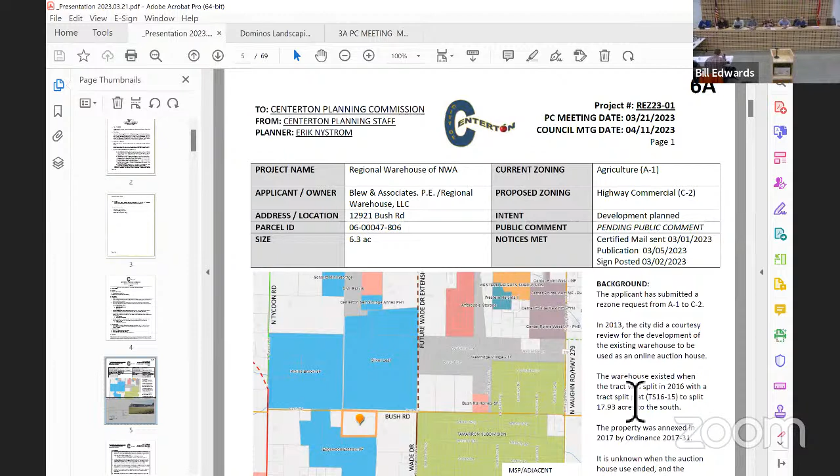Not yet, thanks. Eric, do you want to give us a staff overview? Yeah, so there's a typo on the agenda, it should be Blew and Associates, not Bates Associates. The applicant submitted a rezone request from A1 to C2 on a 6.3 acre tract on Bush Road.

In 2013, the city did a courtesy review for the development of the existing warehouse to be an online auction house. The warehouse existed when the tract was split in 2016, for the tract split plat, to split 17.93 acres to the south. And then the property was annexed in 2017. And we don't really know what the current use of the building is.

But their intention is to develop RV storage on the site. So the proposed zoning intends to have businesses that are dedicated, that are suited towards highway traffic, such as service stations, drive-in restaurants, motels, supermarkets, and similar businesses. C2 zoning contains the highest uses of commercial zoning districts, but less intense than the industrial zoning.

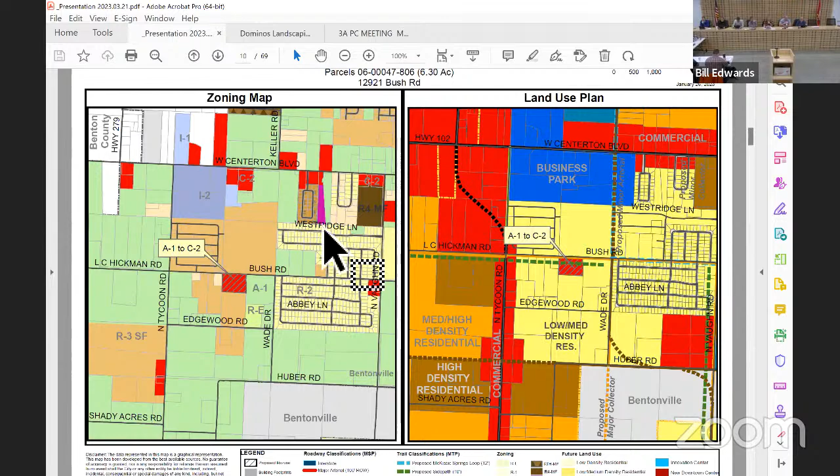The proposed rezone will take place in the land use plan, what it currently deems as low medium density residential, consisting of detached residential homes with an overall density of 3 to 7 units per acre. The overall lot size and density may vary from one part of the community to another. Low medium density neighborhoods should remain the predominant form of residential development in Centerton.

So this wouldn't really be a consistent rezone due to the fact that it doesn't meet much of the following implementation items. One, it doesn't necessarily encourage regional commercial development around major roadways to capitalize on accessibility to consumers and high traffic flows under C2. And then the other is to encourage compatible business near residential neighborhoods to increase access to services and amenities.

What remains consistent, however, is it does allow nearby commercial centers for goods and services to meet the needs of seniors and supports aging in place. It also focuses on short-term investment on infill to avoid significant investment in capital improvements in greenfield areas.

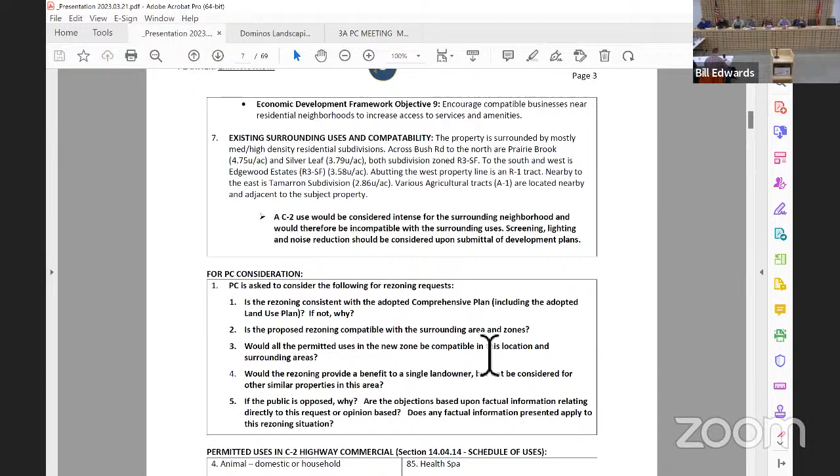Would all the permitted uses in the new zone be compatible in this location and the surrounding areas? There is a list of the permitted uses in the highway commercial for your reference if you wanted to take a peek. I do think that there are some. I'm not sure that everything in this particular location would fall into that - fuel station, pawn shop, restaurant, one really makes sense. Yeah, it's not at a major intersection or anything, it just kind of sits along the road in between all of the housing. But again, I wouldn't say all the permitted uses, but some of them would be. Does anybody disagree with that or have any discussion?

Would the rezoning provide a benefit to a single landowner but not be considered for other similar properties in this area? I know we always have discussions on this, whether it provides a benefit to the one landowner. We would go through the same consideration as we always do for properties in this area, so I don't think it provides a single benefit. We would consider it and open it up to discussion for any of the commissioners.

And the last question, if the public is opposed, why? There were no objections, questions, or comments from any of the public. I would say the notifications go out to nearby residents, and most of that is vacant subdivisions.

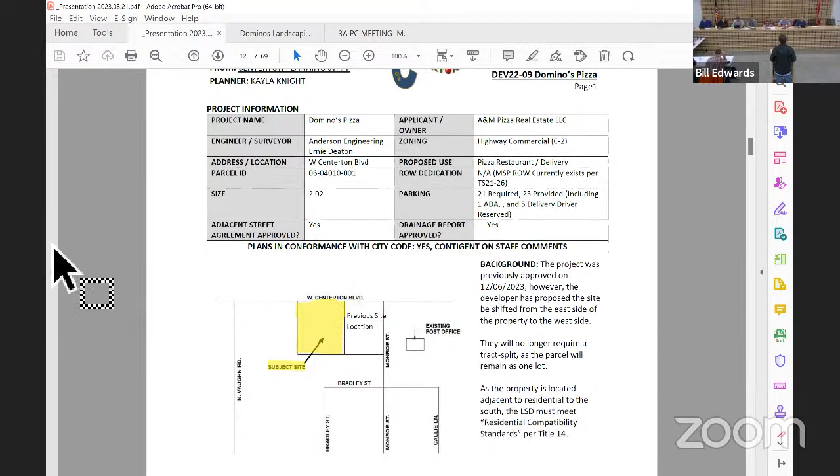This one went before planning commission back in December and was approved. They wanted to come back and make a few changes, most notably to go for a more conventional detention pond over on the east side of the property. We went through a couple rounds - I know there were some more comments either last week or earlier this week, and I believe they've been addressed as of today. Correct me if I'm wrong, but I'm here if y'all have any questions or to answer any questions. Thank y'all. Good, thanks.

Kayla, are you doing the overview? So this project was previously approved on December 6th of 2022. However, the developer has proposed that the site be shifted from the east corner of the lot to the west middle lot, and they're no longer splitting it, so it's going to remain one parcel for now. So we're going to go through a few things you guys probably know from last time.

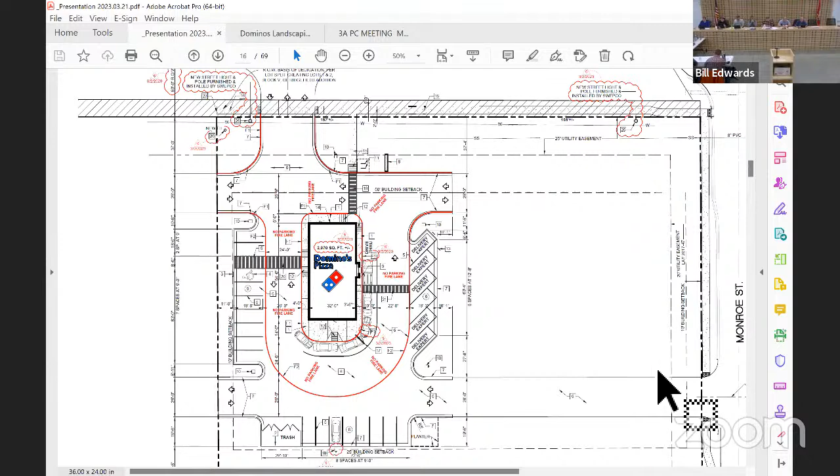There's water and sanitary sewer available along West Centerton Boulevard. They are doing a detention pond on the eastern side of the property. For the adjacent street agreement, right of way was already dedicated via tract split TS21-26, a small property split, so they don't need to dedicate any more right of way. They will be proposing a 5-foot sidewalk, street trees, and street lights along Monroe. And because of the widening of Centerton Boulevard for ArDOT, staff recommend a 5-foot sidewalk along Centerton Boulevard instead of the typical 10-foot, as well as street trees and street lights.

In terms of access and future connectivity, one entrance is proposed off of West Centerton Boulevard. When we went back and looked at this, we made sure it lined up with the proposed Harps entrance, so we're not having left turn conflicts. We've also got one entry on Monroe. We made sure to ask the developer to provide stub outs on all 4 corners of the lot because it's a middle lot, so the 2 lots next to them have access to those 2 entrances, and we're not getting a bunch of entrances off of Centerton Boulevard.

In terms of lighting, they've got 2 new street lights on Centerton Boulevard, one being at the intersection of Monroe and Centerton Boulevard. They have to do a little offset due to, I think, a power pole that's over there. My comment was that we wanted to see a light on the Monroe entrance, and that's in a new submittal they gave us today - they did provide that, so we've got that.

We've got street trees and parking lot islands. They did provide screening along the dumpster and the southern side of the property. On my last round of comments, I asked for even more landscaping, so they get further credit with the more landscaping they give us. This is the most current landscaping plan - yes, this is the one that's up here now, as of today.

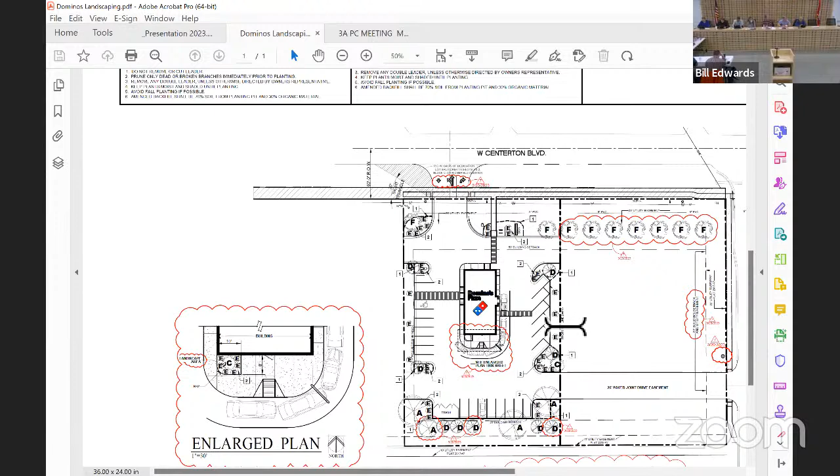Deliveries, I assume they're just gonna go out to Monroe. No, I don't think they'll be able to, because if they're pulling in, they'll have to back out and then come out here. Thinking of coming in, coming around the back. Parking is -- they've designated the east side for delivery. I didn't see that according to this. Yeah, I know we've got two different plans, but the delivery designation is on that right-hand side. So they would back out and then go out to 102.

Any other questions or comments from any of the commissioners? I'm sure you'll look at the dumpster enclosure, right? Okay. I think it looks good.

Just the access easements, how y'all wanna handle that.

If there's no additional comments, then I want to entertain a motion for development 2209, Domino's large scale development. So, on a motion to approve development 2209 Domino's large scale development, pending satisfaction of staff comments. Second. Motion and a second. Is anyone opposed? Thank you. Thank you. Good luck.

All right, next on the agenda is subdivision 2119, Amba Estates. They're requesting an extension. This is at 8660 North Rainbow Farm Road. It's 23 duplex lots, 7.89 acres. It is zoned R3D.

How are you? I'm doing good. Great. Representing the owner. You want an extension? Yeah, due to several factors with the Department of Health approval, getting agreements between other landowners and subdivisions, and the lift station.

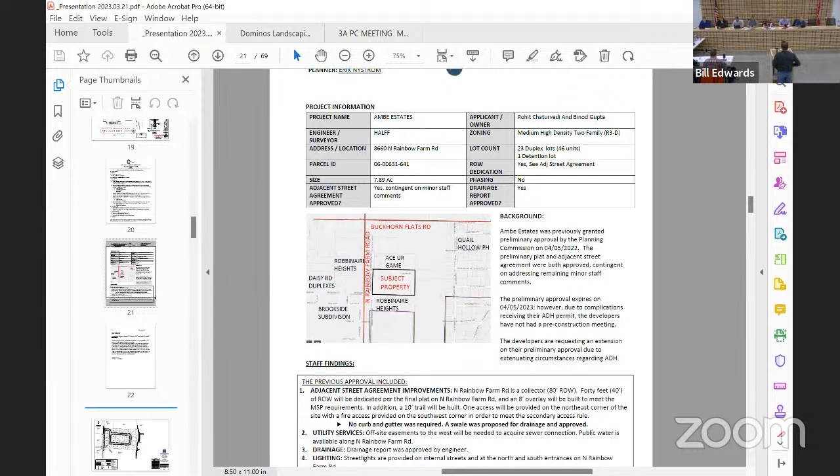Extensions. All right. Any objection from staff? I don't know who this is, it doesn't have a name on it. Any objection? Yes, you have an objection? No. Okay. Any questions from any of the commissioners?

You gonna get an ADH extension too, I assume? I see that mentioned in here. I didn't. Well, just with what's going on with the Department of Health -- actually, the lift station is progressing through the Department of Health, but then with the complications of Centerton and the Department of Health, and just all the other factors.

I think it's being addressed. If there's no other comments, then I would entertain a motion for subdivision 2119, request for an extension. This is Joey. I'll make a motion to approve the request for extension for subdivision 2119 Ambe Estates for 1 year. Craig, I'll second. Motion and a second. Is anyone opposed? Thanks, sir.

Good luck. Thank you. All right, next on the agenda is subdivision 2217, The Landing. This is a preliminary plat at 8931 Greenhouse Road.

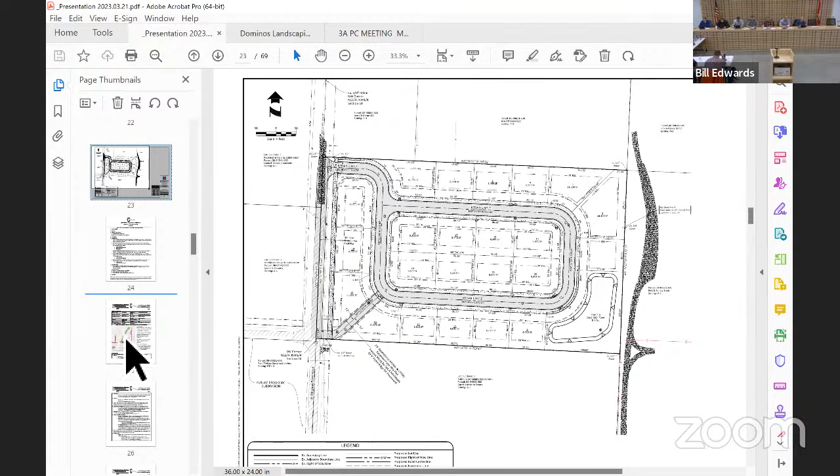40 lots, 10.27 acres. It is zoned R3 single family. The applicant is Roth, and engineers are Bates and Associates.

Jeff, what do you got for us? Y'all have seen this one from Bates and Associates a few times, and we've read through all staff comments and are ready to move forward. We'll be happy to answer any questions.

Diane, do you want to? This one is Kayla's, spearheaded, Diana's gonna back me up. So this is located between Creekside Phase 1 and Quail Ridge Phase 2. It was previously rezoned from A1 to R3 SF.

There is an approved PUD because this had a unique shape. 0.63 acres of it are in the floodplain, and there was a really unique circumstance of them giving us a lot of right of way. That PUD was approved September 20th of 2022.

For density per the PUD, their maximum density can only be 3.94 units per acre, and their current proposal has a density of 3.84 units per acre. Per the PUD, no less than 27% of the development could be open space, and they're currently proposing 30%. For parking, they had to provide 2 covered and 2 uncovered spaces, and they are meeting that as well.

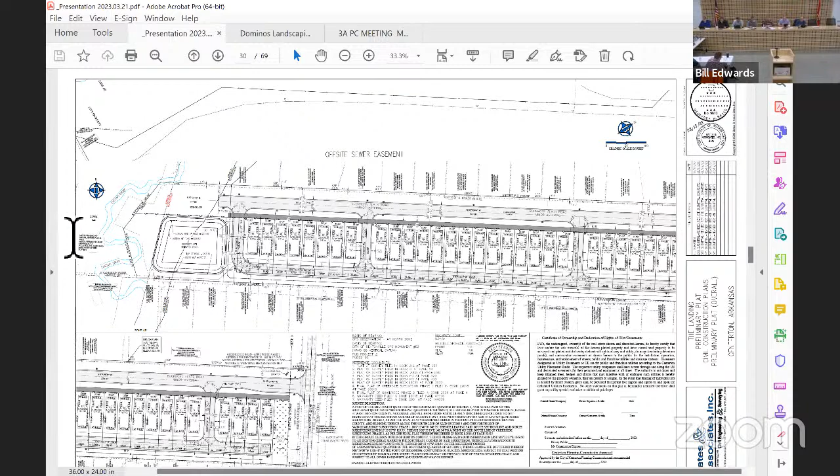For Centerton water, that's available along Greenhouse. Sanitary sewer is being proposed to connect to a manhole offsite to the north side of the property. That offsite sewer connection won't require an easement because it's on city property.

The public has addressed some concerns about disturbing the natural preserve. It's part of the preserve—there is already a sewer line in that preserve, and they would just be connecting to it.

0.63 acres of this is contained within the floodplain, and a floodplain permit was submitted on 3/14. It's being reviewed currently. They also were required to submit a wetlands assessment, which we haven't yet received, so any approval will have to be contingent on receiving that.

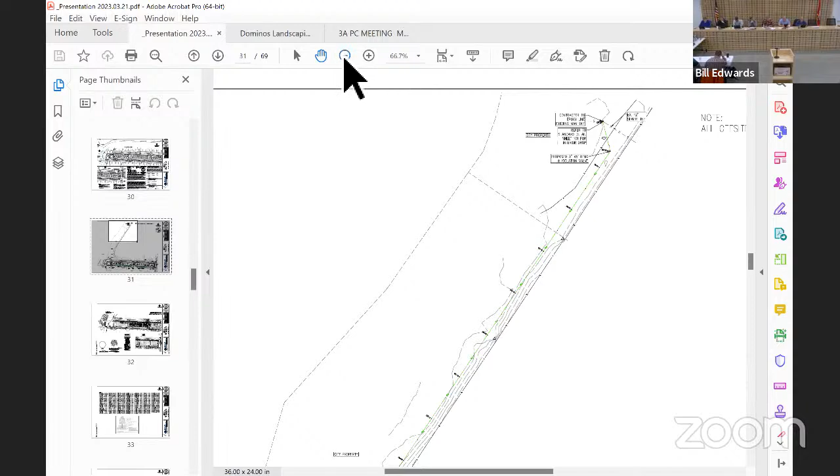For drainage, there's a retention pond proposed on the west end of the property adjacent to the floodplain. There's one minor comment remaining about the pond. Other than that, staff approves it.

For the adjacent street agreement, they've got proposed Buckhorn Flats Road. It's a minor arterial, and on the master street plan it's proposed along the south side of this development. But the city asked the developer to move that minor arterial to the north side due to the proposed widening of Greenhouse Road and the way things ended up lining up. So they're giving a full right of way of 80 feet, all of which will be dedicated with the development. They will be completing full widening of the road, curb and gutter on their side, and also doing the 10-foot trail, street lights, and street trees.

For Greenhouse Road, it's a major arterial with a 100-foot right of way, so they'll be dedicating 50 feet of right of way and then doing street lights and street trees. Other improvements will be completed with the Greenhouse Road Improvement Project. Staff was in favor of not requiring any fee in lieu for the greenhouse improvements because they're doing the full 80 feet of dedication and improvements.

There is a trail on the master trails plan, McKissick Springs Loop, proposed along Greenhouse Road, with a bit of it also on Buckhorn Flats Road. There's also a proposed 10-foot side path along the west side of the property, traveling northeast-southwest along the creek.

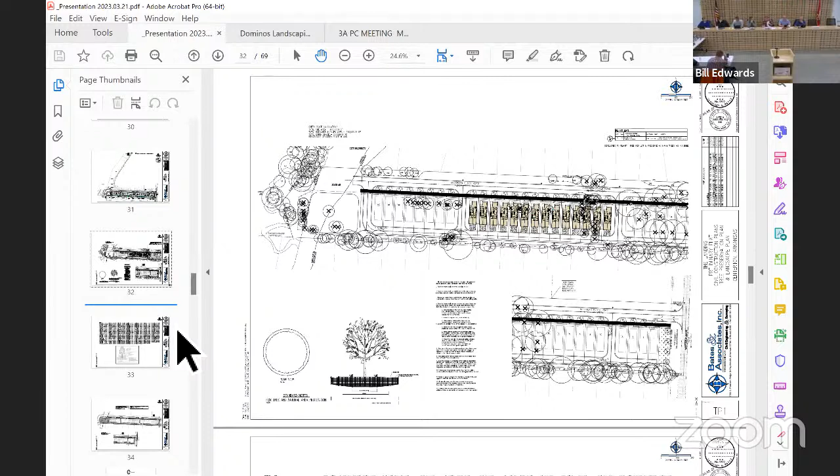But Jeff, looking at your stacking on your exit out on greenhouse, I was wondering if it would make more sense to extend that right now, so when greenhouse does come through, you don't lose like 30-40% of that stacking. Good - didn't really affect anything. That makes sense to me, but just wanted to throw it out there.

With the greenhouse expansion, they're still working through the 30% plans. The big thing that changed a lot from last time was that the road was on the south - it's on the north now. Had it remained on the south, there's a traffic light proposed at Quail Ridge as part of that expansion. Putting it on the south side would have put the access road 100 and some feet from that intersection, which just wasn't conducive for safety and people getting out of it as it was. So we'll flip to the north side.

It won't have left turn out from there - not when greenhouse expands - because it's going to be a divided highway, so it's actually going to end up blocking that left turn, backing onto... not sure what Quail Ridge is on the other side of greenhouse. Do we even need...

I guess in the short term, until that's done, the left turn would be nice. Correct, and part of it is there's flexibility on that turning, but the worry is with that divider going in - trying to see where that stacking goes with that. Are we going to push it back? I mean, like I said, that's part of where we're at with the 30%.

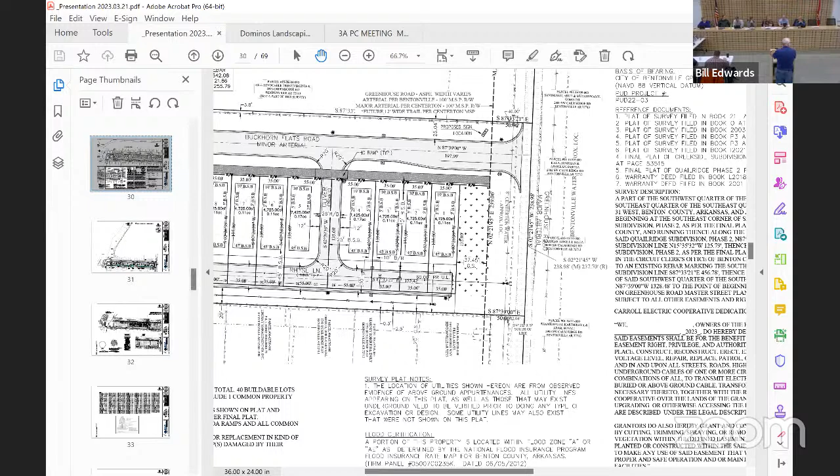The other part was with moving it north - in order to put it on the south as originally planned, there was at least 2 or 4 homes that would have been completely taken out in order to put a roundabout in, to even try to tie that road in. So when we moved it north, does that do anything to the creek crossing in the future for tying into Buckhorn Flats? Any kind of bridge actually gets longer just to make that move back to the south, but it doesn't actually change.

The other thing - I think it's fair to waive the greenhouse requirements because you're building a whole road, but... you know, it stops short. What's the plan on that? We use that as a transition to tie back in with Buckhorn. Continue? I mean, it stopped short - I don't think it goes to the end of the property. It doesn't tie back in at the end - that's the creek.

That's where the creek bridge is. That would end up starting, you'd have to make that connection. Stopped at floodplain, good with it. That's a logical place to stop it. Yeah, 'cause that's where the bridge would end up starting, so. Yes.

Mayor, I just wanted to ask, I've received phone calls on this. Since it came in so late, I printed you one resident concerns, which is pretty much a consensus of most of the residents that I've heard from, the same concerns.

The only thing I asked too is apparently there was a sign posted on the property. I think some of these are residents there and they thought there might be a public hearing or they'd be able to offer any public concerns due to the sign that was posted. I don't know if it was a public hearing sign or a public notice. Anyway, I think what I wrote you pretty well sums up what their concerns were, and I just wanted to ask if they had any other additional. That's all I had, thanks Mayor.

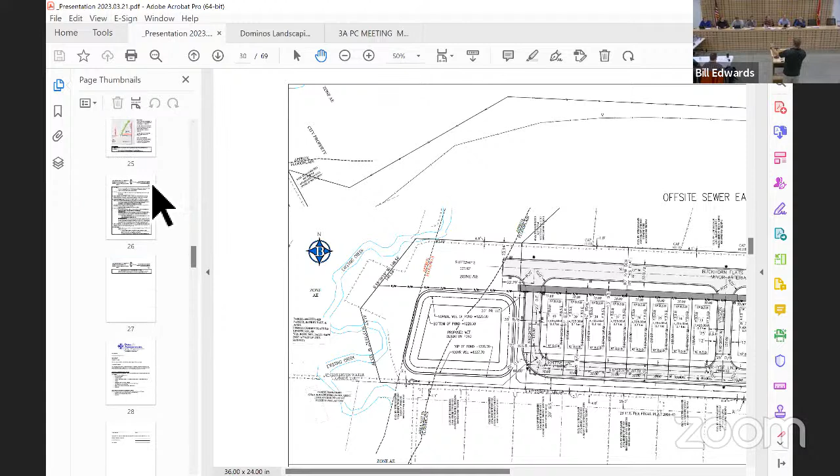Because now you're going to have to run a road and split it, it's gonna be about the same shape. If you are gonna develop it, it's gonna have to be as congested as that for the future. Are you talking about a greenhouse? No, I'm talking about Buckhorn Flats Road to Buckhorn Flats Road, because if you draw that line right there, it goes straight through my house. Then it'll curve to meet Buckhorn, or if you even curve it on the property adjacent to mine on the east side.

We don't know when that road's gonna be finalized. It's not like we're planning to make that full connection right now. So I understand your concerns when your house lines up with it. Likely that won't happen until you decide to sell or develop that property. And just like this, we'll consider where the road goes at that time. And let's say you do sell your property, somebody's probably gonna develop it and put a bunch of lots on it, so they'll design around that to carry that road through.

You know, took all that into consideration also when you moved all this, because it was supposed to be a split minor arterial, right? With the median center divider, 100-foot access down against the north side. I don't know the specific section on that. That's what it was, the street section, the first time we came. And that's when they were building the homes.

Can y'all pull up the map for the trailway and everything they want to do? How is it gonna... plans? No, the plans that y'all have currently for the Greenway. That was planned to go through there. Or Master Trails, yeah, plan. Master Trails plan. Master Street plan too.

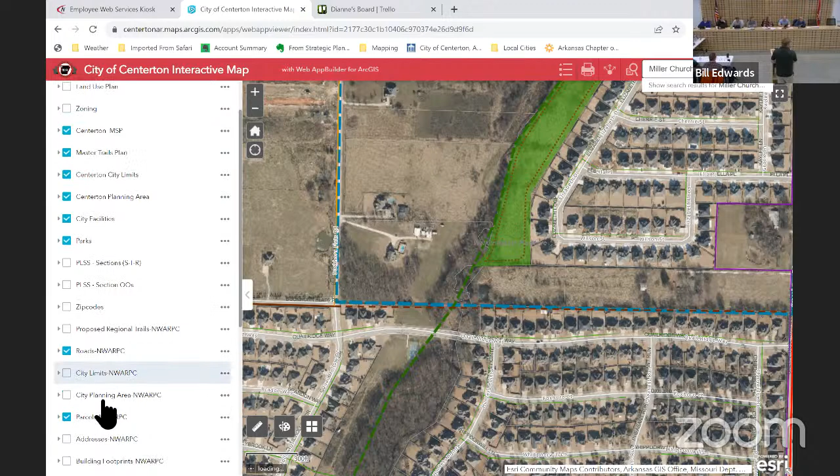Now, as far as greenhouse, what are the future plans for it? How soon is that gonna happen? Because right now, we see it every day. We almost have to dodge cars on a daily basis. It is chaos trying to get our kids to school. We're trying to just commute that road, period. And if you're gonna add this many more houses to it...

Is there any laws or anything set up to where the congestion problems should be addressed before it's built? No, sir, there's not. I don't know, Alan, if you want to address—I mean at least 3, maybe 5 years, I think was the discussion when we were here. That's a massive concern, if y'all have driven that.

Yeah, greenhouse is in the process of being designed and expanded. But these do take a long time, with the amount of rules that they have to go through. Right now, the plans aren't even completed with it yet. And then once those are through, they can start working on the utility relocations and then the actual widening of that road. So by the time it's all said and done, you're still looking at years down the road.

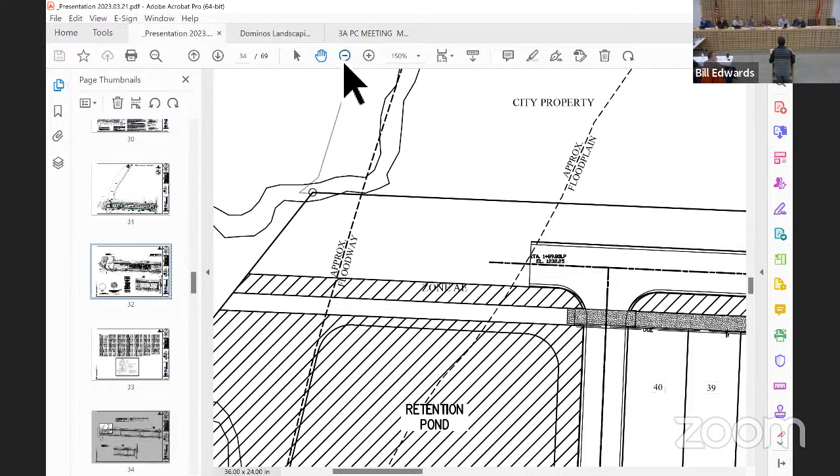If there are alternatives in how that can be run, rather than taking out nature that's back there and impacting the wildlife, because there's a lot of deer and other animals that come through there.

The second piece—I know it's already been approved, but safety is a huge concern. If you have not tried to turn out of our neighborhood on Ella Place in the morning during school drop off, I can sit there at that stop sign for 5 minutes some days just trying to get out. I have serious concerns as my kids get older and able to drive, being able to make that turn. I understand it's 3 to 5 years away, but there are plans for that.

I have very strong concerns on the amount of homes and the amount of traffic that'll be increased there, not only through this location but also the apartments being placed at the end of Greenhouse.

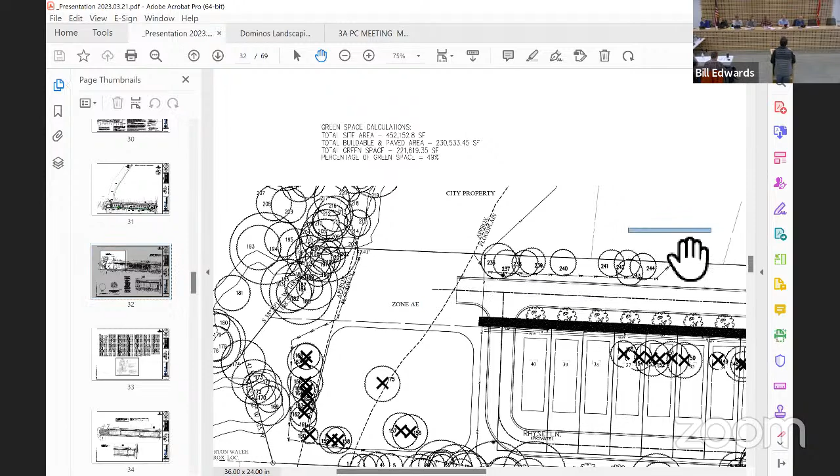On the third point, it was specifically the homes and how far west of the units they're being placed, extending past the home line within Creekside, if I'm reading the map correctly. These furthest units to the west are going to be looking directly into the backyard of other existing homeowners.

That was part of my concern about how much screening is going to be planted or kept there, which I know was at least mentioned a little bit earlier, but making sure there is a screen or potentially pulling those units back for consistency with the existing home development that's there.

Well, you can see the trees proposed—those are existing, and those are existing, they're going to remain. There's a tree per lot on that side, in front of the houses. Jeff, is the front of the house facing south? No, the rear is. Okay, and then the axis of the drive or the garage is from the garage south—it should be on the back, on the south end.

So that's my concern, you can see the line right there—that would be the last property line. Those last two units are going to be looking directly into the backyards of existing homes. It's like the property actually goes further west than Creekside, if that's the last lot in Creekside.

I mean, that's my point. But that's their property that they purchased—it's a different shape than Creekside, so, I mean, that's how it is.

Privacy is a value there, but it's also important to make sure it's not getting into that floodplain. From experience, it's a wetland and it gets extremely wet. It does flood very often. There have been a couple of years where, since Creekside homes have only been there for 3 years, I've seen that water level rise very close to our house, all the way at the backside of the Creekside property line.

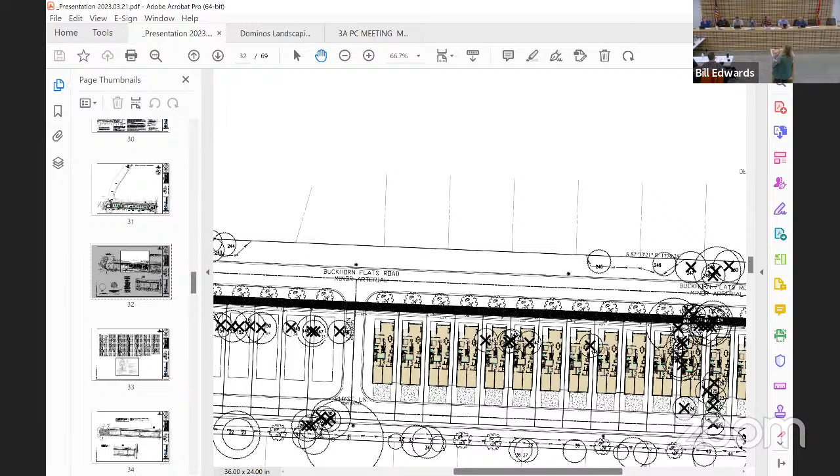On the landscaping code, it says there would be 80 trees, but the staff felt 35 would be enough to cover it. I wanted to know why you're looking at 35 trees instead of putting 80 back. I think 87 were being removed.

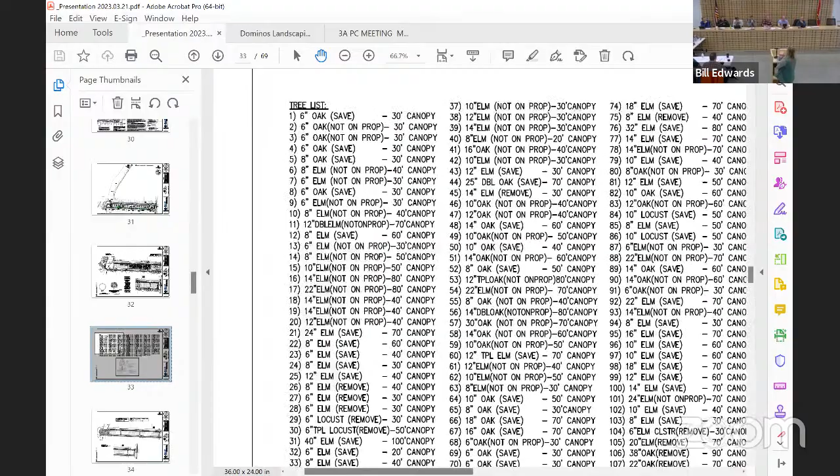It was code to put 80 in based on that, but it's not actually been adopted. It's in a draft form that still needs a little bit of work, and then it goes to the public, and then the city council has to approve it as well. Today it's just a suggestion, and we ask for those things, but we can't require them to necessarily do it.

The other part is that when that road gets expanded, it's gonna go north. I don't know how much green space would be left. I don't see that ever being expanded north. There should still be enough space that trees can be planted by the city there, in the city right of way. If you look at most of the trees being removed, they're where the homes are gonna go.

And then they're adding trees back in front of the homes, adding about half of what they're taking. I don't believe they're taking 80 - what was referenced in the report was what the draft landscape ordinance would have called for, and they thought that was a lot. I don't disagree with you, because I brought that up first, that maybe some trees on the north side of that road would help, since it would be more directly in, closer to those existing homes. We can let Jeff or the developer talk about that if they'd like.

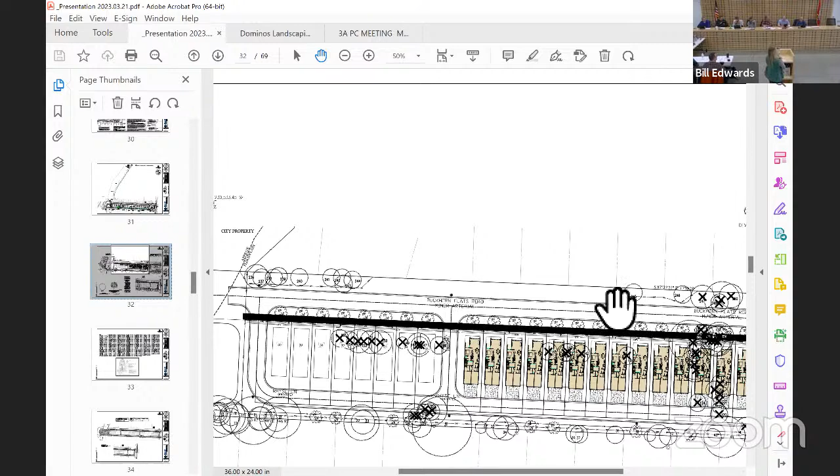Hey, Jeff, what are y'all's thoughts on putting some trees on the north side of Buckhorn for the existing residents? Because she did make a very good point about the streetlights, one, and then two, it just helps screen.

Yeah, we're not gonna take out any trees if we don't have to. From the back of our house to the south, we're 80 feet to the Quill Ridge property line, and from the front to the north, we're 100 feet. Maybe this is a better way to look at it: the south property line has a ton of trees and vegetation on it. On the north, we're taking out 4 or 5, but there are some large gaps where there aren't any trees, and that's where they're gonna be putting in lights.

How would you feel about filling in some of those areas where there aren't any existing trees? If we've got to put a few trees in, I'm all about that. We'll do our best to not take any out - unless it's just what we call a scrub tree, an old broke down elm tree or something that's not gonna live and will cause problems later. But any nice tree, we're gonna do our best to try to keep.

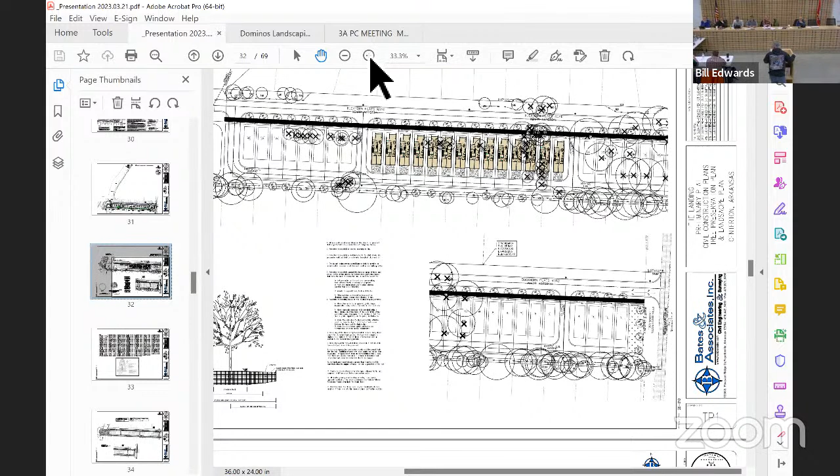One thing we had talked about with this road is that the city gets trees donated to them and the Public Works Department, and this would be a great place for them to be able to put those trees. That's what we were talking about doing.

Then we can put them where we want after everything gets in. But in the meantime, I think it would be nice, Jeff, if maybe somehow - Joey was gonna point out where the lights are at, right? Is there a way to, in this area, for the lights, kind of hide some of that light pollution into those trees?

Yeah, there's one or two more I think that's on there. If that appeases everybody, then I'm easy. I think that'll be a good start.

I'm good with whatever we need to do to make everybody happy, and we just gotta - no pear trees, man, keep trees in there that.

They're not on there anyway. All right, thank you. Thank you. Got my allergies all messed up.

Yeah, I have one more question on this, because I'm sitting there talking about streetlights, and I'm the one that gets all the complaints with the light. These lights they put in now are super bright. We shield them on the rear? That's what I was getting ready to ask, if you would get with Carroll and have them shield them on the north side of the light itself, because they're gonna shine all - will they do that?

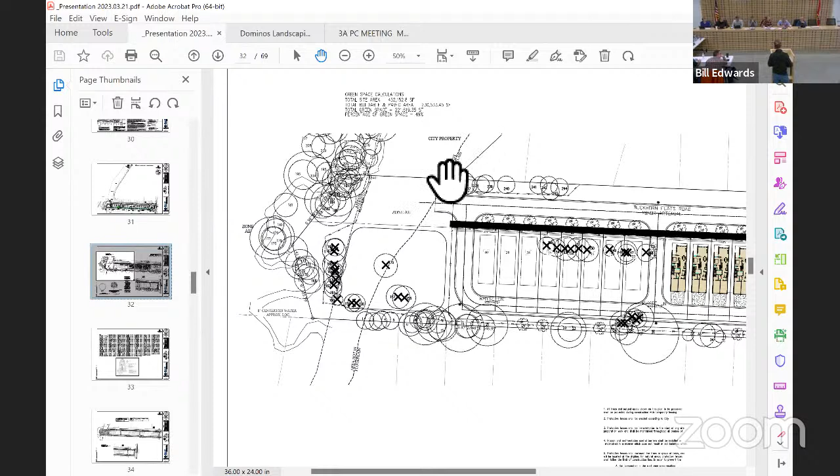If you look right there, if that survey is correct, where they're showing their sewer line going is right between the end of the road and all the trees you see by the creek. Off the back of the print, yes, we're not taking any... Maybe one or two.

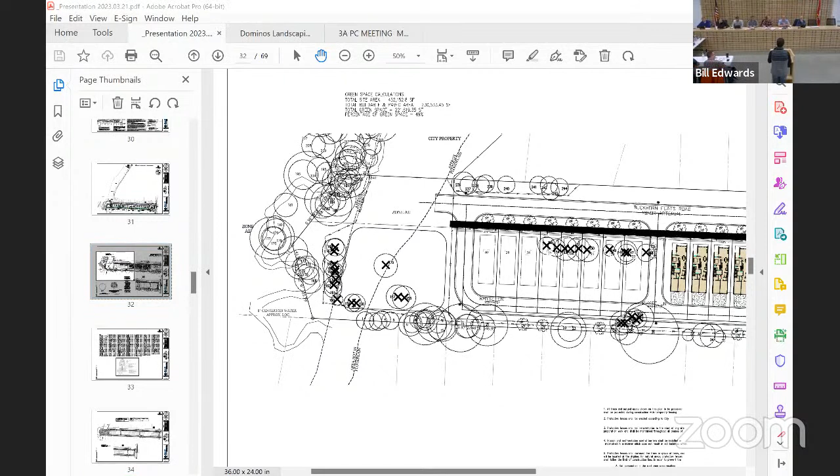One thing I was confused about in the plan with the tree list - I know they measured a lot of trees directly behind a few lots, at least right here, within the back shot of my backyard, because there are a lot of trees in that area. I'm not sure about the aerial, but you can come and look at our backyard - we essentially have a forest right there, and they were measuring it within the survey. You're talking about the trees off your property, right? Yeah, through the nature preserve. Can I come show you this photo? Sure, that's a current aerial.

So 15 to 20 feet off of the property line would be right here. There's a lot of trees that are coming through here behind everybody's property line, and that's the concern. I don't know if that is documented on where that pipe or that sewer line will go.

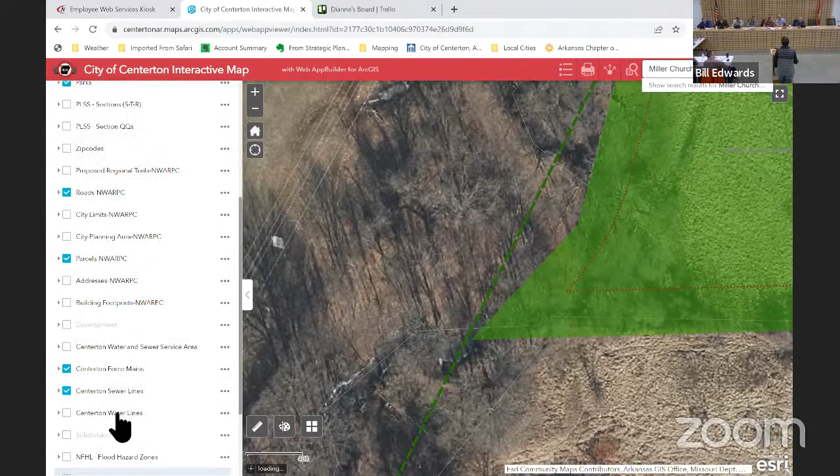A lot of people have put non-privacy fences on that back side to be able to enjoy the nature that's there. They made that decision when they bought the property, when they moved there, and when they built, about what they wanted to do with their back fences to enjoy that nature. By taking away those trees, I don't know the width of what the construction would be, but I know they mentioned it'd be 15 to 20 feet off the property line, and it would take down a bunch of trees doing that.

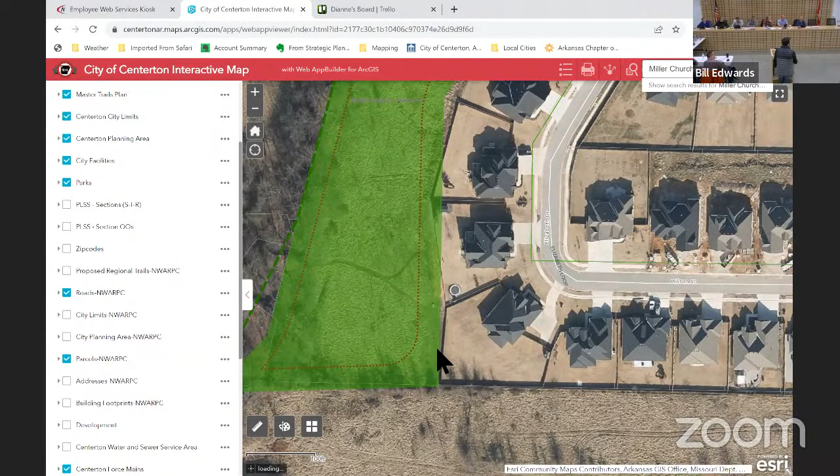This is also the current aerial. What's the property on the green? This is the property line right back here. That's where the sewer is going, about 20 feet off the fence, and it's only 4 inches.

Is it a force main all through there, and you're probably gonna go 2 or 3 feet deep? We're looking at like a 12 to 15 foot swath. We're not just gonna go through 50 feet and clear all the trees out, it's just gonna be a small area to get that force main. So that's the point of clarification the neighborhood's looking for, is what is the impact gonna be. We understand how far off the property line it's gonna be, but how wide is that construction zone and what trees would be taken out?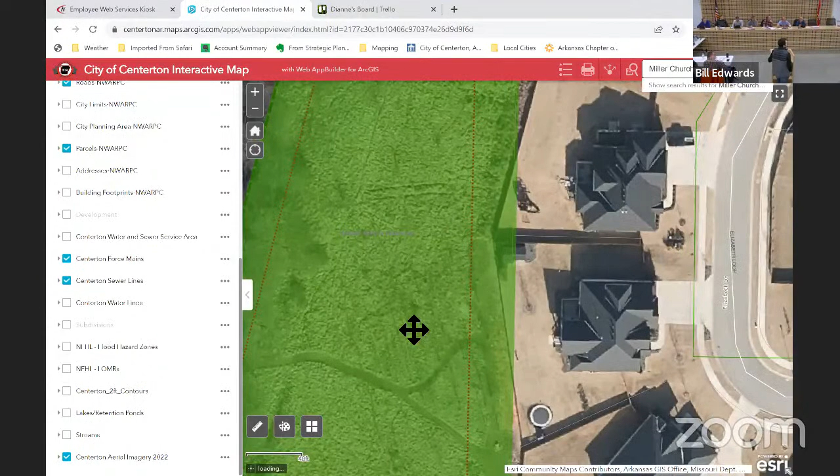I don't know what to tell you. This obviously is in the fall when the trees don't have leaves. I can show you pictures of my backyard. You saw the aerial with all the trees that are there, but it's one thing to see it here, it's another thing to stand in that backyard. There's hundreds of trees back there.

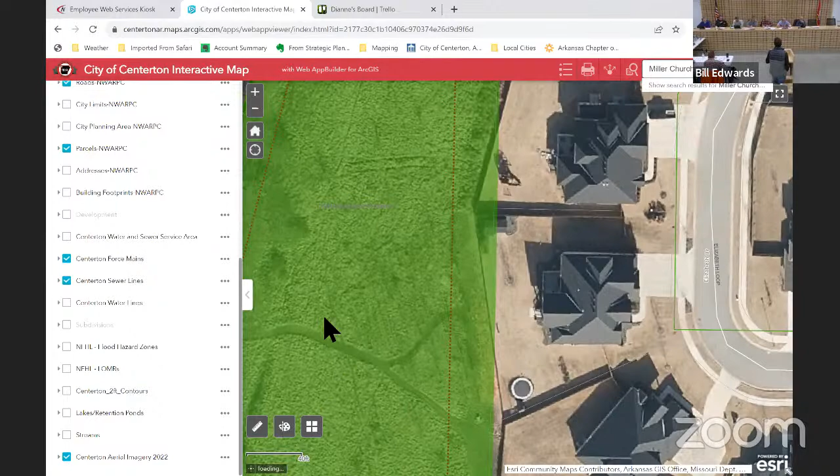Thank you. If you just click another house. There we go, now we can see. What was your question on, in addition to that, Joey? I'm sorry, nothing, I was just wanting to see this. Okay, just looking, can zoom out and follow that way up.

I mean, really, it seems like the path of least resistance, and all that land's been disturbed when Creekside was built. I understand if it's in an easement on somebody's property, but this is a completely different property than this one.

Is there anyone else that wishes to address the commission? Cindy Zimstein, 1093 Main Street.

I just wanted to address an issue that this gentleman asked about, laws for protecting the roads. This may not be a law, but it is an objective on the comprehensive plan that the commission has been entrusted with. It's number 5 on the comprehensive plan objectives, which specifically states: prioritize land primed for development that takes advantage of existing infrastructure over the premature development of undeveloped areas or open space, to avoid overextension of services and unnecessary cost increases to the city. So there is an obligation.

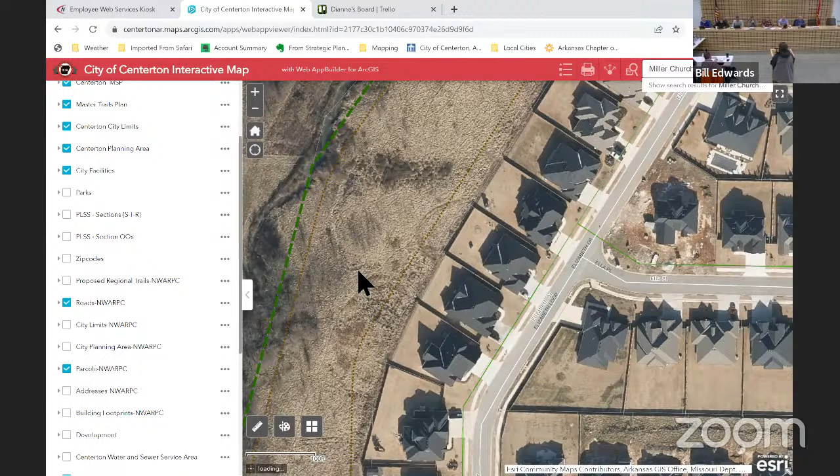I know it's already done, but the commission has been entrusted to cover that for the people. There's also an infill goal on that list as well, that this would meet—to infill properties like this, to develop those that are closer and have access to all of those amenities. Understanding this, and in this case, we're actually getting a road that's part of the master street plan.

Right, but it's a combination of things in regard to that. I sympathize with you because we're going through the same thing on Main Street—we have way too much traffic, and it just doesn't feel like that's being addressed appropriately. There's already plans, they're currently working on plans to expand the greenhouse, so that's down the road. There's not much we can do to speed that up, it's already in process, and we can't tell people to stop developing necessarily.

And so we live to those as best we can. In this case, there's actually two that we see that we're agreeing to, if you will. That is the infill and the fact that we're going to get an additional road, which is part of our master street plan.

At the end of the day, Alan, do you know what the trip count is on Greenhouse? Top of my head, no idea. 30, Tony, what did, like 30 or 40,000? It was like 30,000 if I remember. Trip count on Greenhouse, what time of day? Yeah, what's the high number? Probably 12,000 during the peak off hour, peak morning time, peak daytime, evening time, divided.

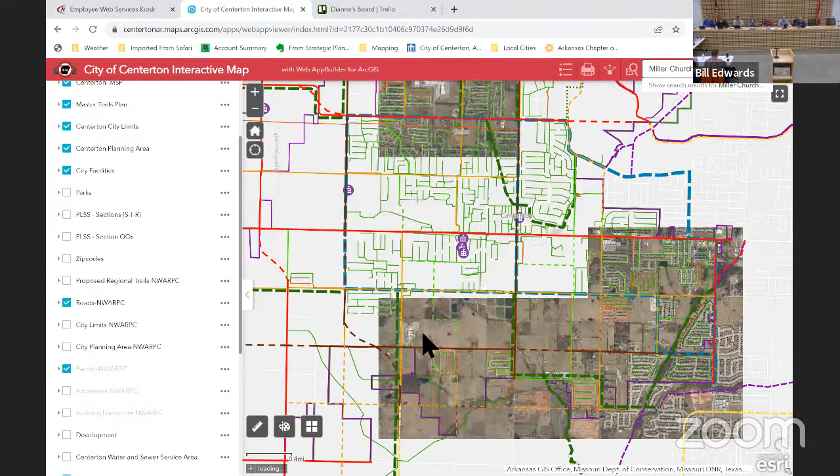I was just going to say that statement is referring to developments that happen on the dirt roads that's disconnected, and the extension of utilities and street improvements all have to be done to get there. So yes, like that. It's disconnected from what's going on in the central part of the city.

Is there anyone else that wishes to speak? Okay. No, we don't have a public comment, so.

I think the big thing is, of course, the light pollution, which we talked about, the trees on that north side, along with potential infill with the city. I think those were the two biggest concerns that I heard tonight. If you guys can take a look at those for us, as part of, if we approve it this evening, okay?

If there's no other questions or comments, then I would entertain a motion for subdivision 2217, the Landing.

One question, sorry. The green space lot far east, is that numbered as a lot? I don't know that I have that sheet. I just want to make sure. You won't believe this, probably when they were trying to print out the green space sheet today, it was impossible. Really? It's up there. Oh, it's the whole thing, it's like a big flag lot. I got you, there you go. They have one more question for you on your sewer.

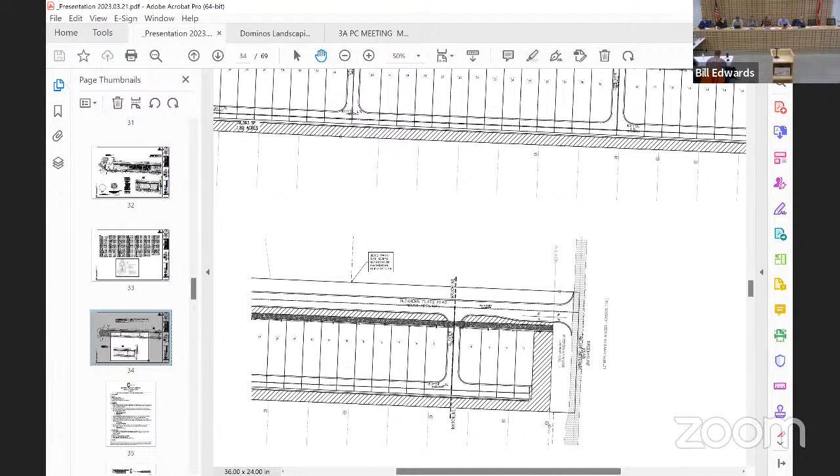All right, so I would entertain a motion for 2217, the Landing preliminary plat at 8931 Greenhouse Road. It's 40 lots, just over 10 acres, and it is zoned R3 single family. Also the adjacent street agreement, which would be, no fee in lieu, 50 foot of right of way on Greenhouse, and then they're doing the street improvements for full street build out, 80 feet.

This is John, I motion to approve subdivision 2217 Landing preliminary plat and adjacent street agreement with consideration of light pollution and tree screening on the north side. This is Ben, I'll second. Motion and a second. It does include the preliminary plat and the adjacent street agreement, correct, John? Yes. Is there anyone opposed? Look, guys.

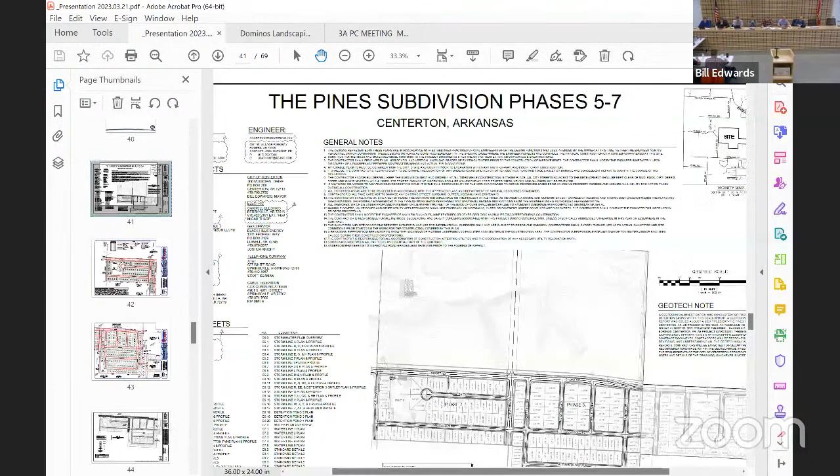Anderson Engineering is the engineer on record, and Micah Souter is here as the primary engineer for all of this. Thanks.

Dianne, are you going to do this one? Yes, this one is me. This is the Pines Phase 5 through 7. They already have preliminary approval for Pines Phase 4, which is over here, just to give you guys an idea of where this is. Walters Road is over here, and the Pines Phases 1 through 3 that are currently completed are in this area right here, so they will be connecting into Pines Phase 3.

This particular phase is 63.35 acres on the west side of Walters Road, connecting from Walters Road over here to CP Rakes Road, with the completion of what was Short Road, but apparently our department said you can't use that name when it crosses Walters Road. So they have a new proposed name called High West Road. Any reference to Short Road in this particular subdivision should be High West - the newest plans I received show it as High West.

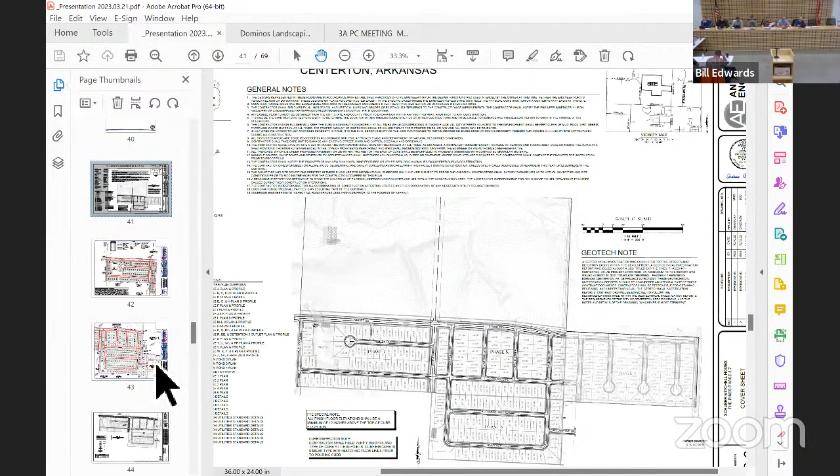They are doing 206 single family lots, and there are also 3 detention ponds with this particular project. One of the detention ponds is on this property that they also own, that is Tract C, and I have a better map of that pond up there in relation to phase 5. Then phase 6 and 7 will also have their own detention ponds that are also in y'all's packet.

They are extending Short Road / High West Road, or whatever it finally ends up being named. They are providing - it's a collector - 80 feet of right of way, so they will be dedicating the right of way and building the road. I will show the adjacent street agreement here shortly. There is a weird spot where it connects with phase 4 because they do not own this property on the north side, so they have to do a little connection.

Is that where the road tapers there? Yes, so they're trying to make it work so that it'll widen back out to the full width once they own both of the lots. Through here they only own on the south side. They are still building a full width street, but obviously they can't do the entire width of it right now because they don't own that property.

And they are also providing right of way for Wolverine, which runs north-south. It's going to divide lots in phases 5 and 7. So they will be constructing a full local width street, but they are providing the full 80 feet of right of way along the streets.

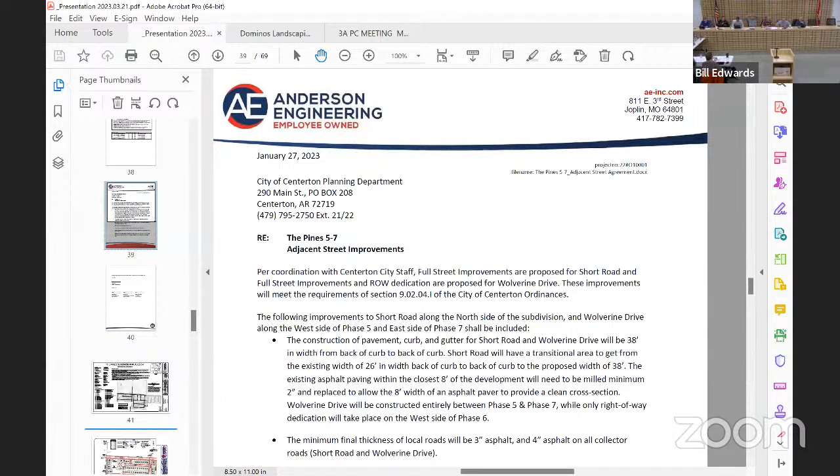Who owns on the west side of CP Rakes? I don't know, it's not you, right? No, it's county. So how are we building the road onto that property without showing right of way acquisition? You got some curb you're building over there, it looks like. Some drainage.

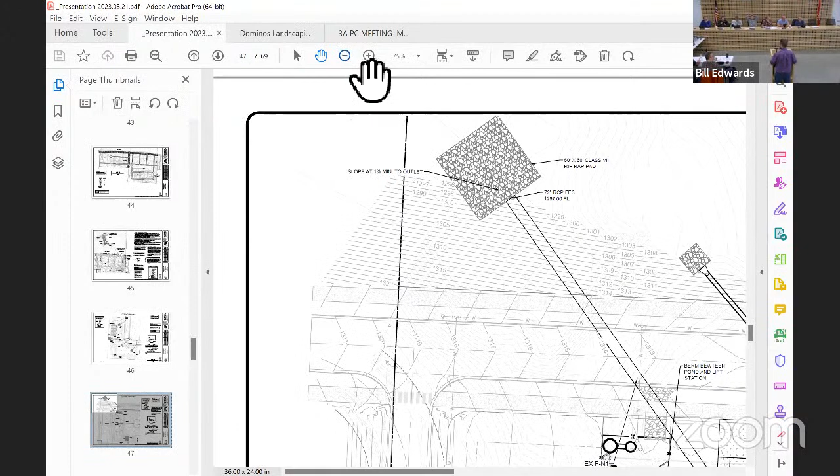My name is Micah Souter with Anderson Engineering. So yes, on that corner over there - to be honest, I'm not 100%, but I will circle back on that. I was not the original associate with this project, but we're definitely looking into the case. I don't know if Diane has any further information.

We're doing some grading. It looks like we're doing all kinds of stuff on the neighbor. Yeah, this one's theirs, they own this piece of property. Okay, then that leads me to my next point - what about a drainage easement for all the stuff that we're putting onto a different property? Like the detention pond offsite, that pipe. There isn't a detention pond offsite. It's on their property, but it's not within this, it's in tract E.

It's a different piece of property. The tract E property for the offsite detention pond that you mentioned will be covered by a stormwater drainage easement. It doesn't show it on this drawing, it doesn't appear to, but yes, that is the plan. I didn't see it anyway. Tract E, north of what's shown here.

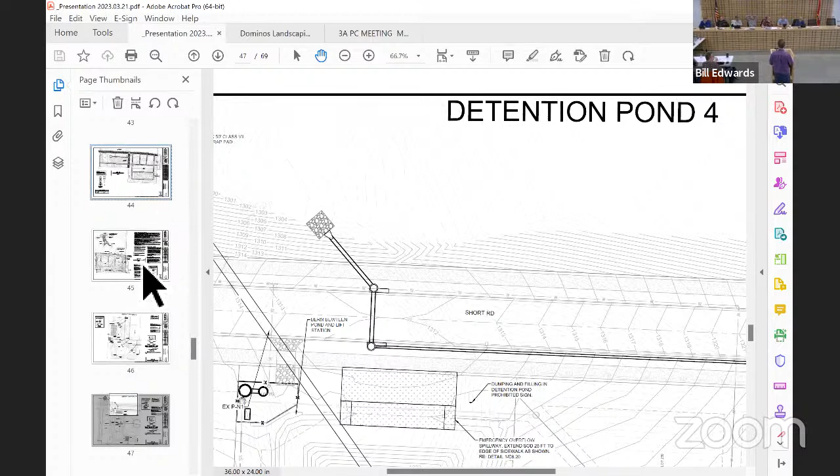Back up here and go to this... mountain area. I'm mostly concerned with the road and the road improvements on the neighbor. This is tract E, this whole thing over here, yeah, all to the north. Because I guess, let's just say it gets built, they're not gonna own any of those lots anymore.

It looks like you have street drainage, right? It's also combining with their subdivision drainage that's on somebody else's property. All that's on CP Rakes is draining east to tie in, so it wouldn't be discharging from that road off to the west onto anyone that way. No, I'm talking about the detention pond and the big pipe underneath, it's already almost a riverbed, right? But it's still somebody else's property.

This is still currently their property. Right, but when they sell all the lots, it's not gonna be. Yes it would, that's still part of that tract E. Yes, but they don't own the southern property that they're developing anymore. That'd be like me putting a pipe onto your backyard. That's you putting a pipe into the ditch that's already in my backyard.

Just bring it up, man. Who owns the pipe? I'm not sure, I'm not sure what you're saying, Joe. Well, who owns the pipe? Let's put it this way.

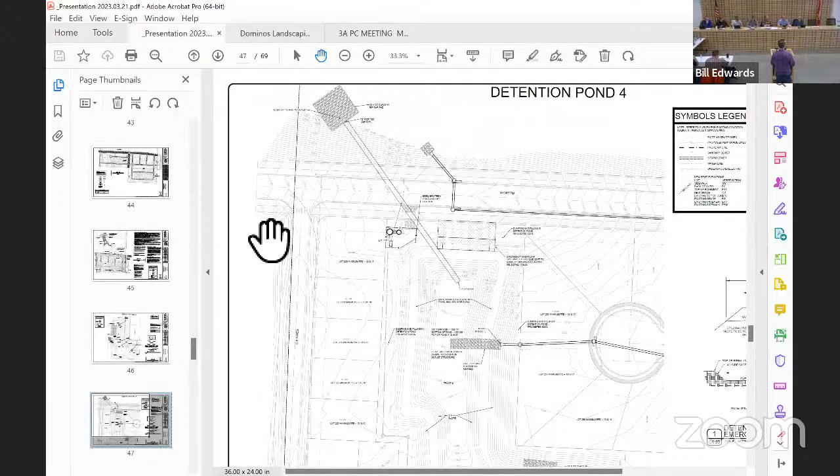So have y'all talked to the property owner to the west of this? As far as I am aware, I've not been involved. I do know that this is just shortly upstream of Army Corps jurisdictional and floodplain waters. We're not there, but relatively quickly, stormwater runoff gets up into what is considered perennial flow. So it already experiences high levels of flow. We're matching existing drainage patterns here. It's just a function of different properties.

You good, Joey? I'm good now. Lots of trees, those trees like over the road. I had one question on lots 1

and 17. Are those gonna face Keepsake? No, roads will be on Wolverine or Short Road. No driveways? Correct. Okay, thank you. There will be driveways on CP Rake though. I was about to ask. And I hadn't gotten that far. No lot shall have direct access to...

Why are they coming off of CP Rakes? Where else are they gonna? What's that designation? Why are they local?

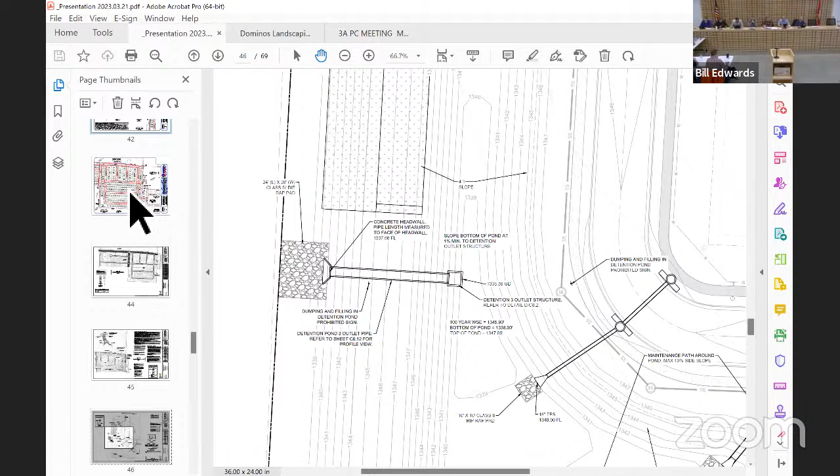Just, you said local. Still don't like it. No. We have done everything in our power the last 10 years to not have driveways off of streets like that.

It's in the code, right? Or it just says arterials and collectors, or what's the code state? Arterials and collectors, that's what I thought. I'd originally saw those and then I didn't say anything. I was more worried about the others.

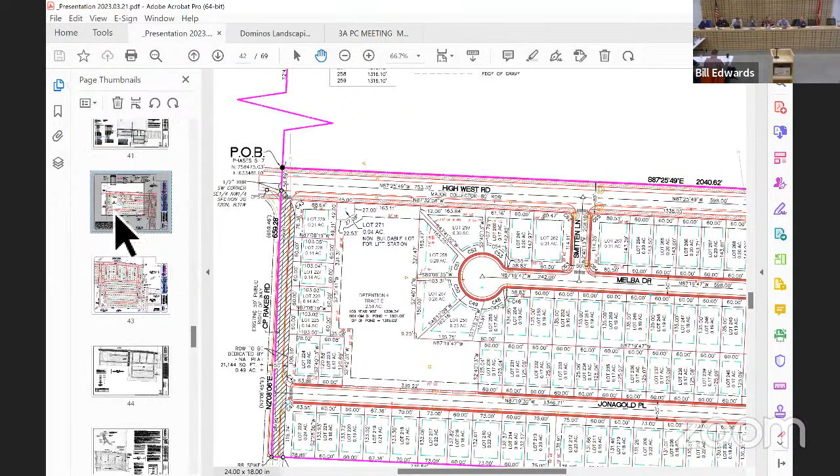Anything else from any of the commissioners? Did you go through the adjacent street agreement? Sorry. Oh, so the thing with CP Rakes is that's not even designated as local, it's just an undesignated road. And that's the county line.

What are they doing for improvements? And they are doing a fee in lieu for future street improvements on Wolverine Drive. That was my next question. They're not doing improvements on CP Rake. Yeah, wait, that's what she asked. Okay, I was like, wait. They're leaving it, great.

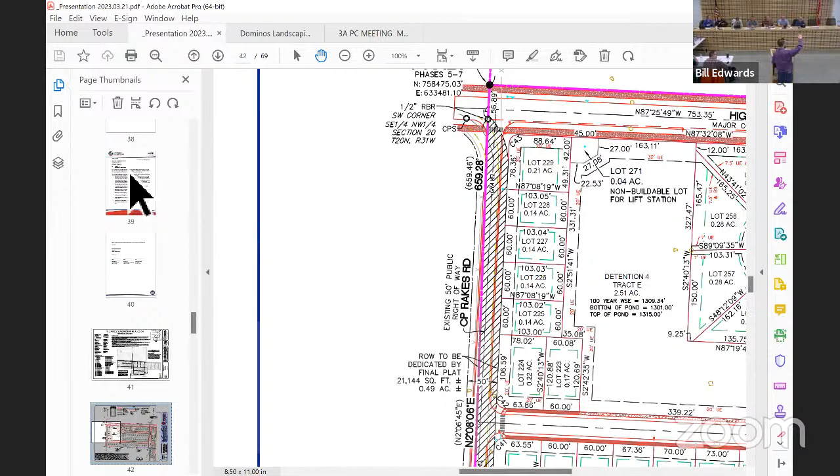CP Rake, they're not doing this... doing right of way. I mean, they show curb and gutter and everything at the T. The CP Rake is going to be improved. It's not to a full typical street section. It's like 20 foot wide with 2 foot paved shoulders on either side for the length of the property, I believe is the current cross section.

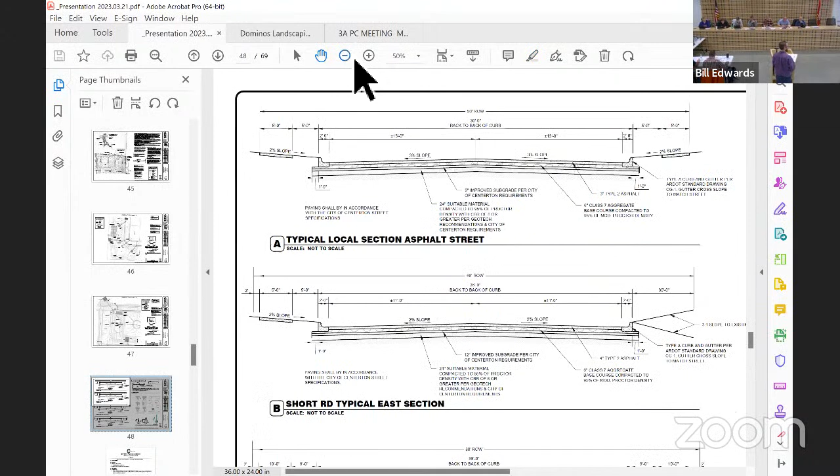So they're asking for phases 5 through 7. Mhm. And they're asking for a preliminary plat and adjacent street agreement. I have one more question on Short to the east through phase 4. Are there plans on that, like to make it match back to the west eventually? So when the property to the north of phase 4, if they ever sell and develop - that's not owned. So when they sell, that's when that becomes a 3-lane.

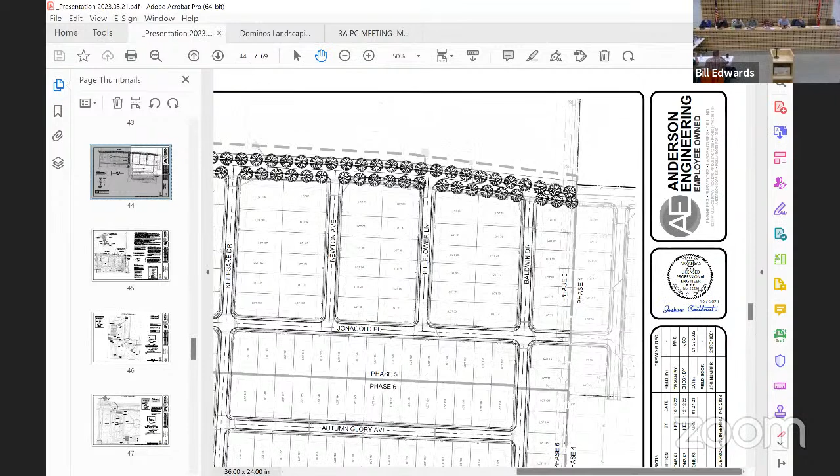There'll still be a slight transition between 4 and 5, but that's still that quarter-mile from both Walters and then Wolverine intersections. One thing to look at - it looks like their sidewalk on the north side is short on their portion where it's tapering. It looks like it just consistently follows the back of curb. We probably want to set that up where it'll tie in to the future. You know what I'm saying? You were there.

Looks like it's so the 10-foot there with the new does tie in. Would be where it'd be this final location. Ties in right now, I got you.

Correct, because I don't think there's a sidewalk on the north side of Short. When they develop to the north of this one, they'll fix that. On phase 4, as part of when that expands, you'd get the sidewalk on the north side as well as tie in that curb and gutter.

Yeah, I just want to make sure it's in the right spot. It's supposed to be here and not here. Because their road narrows, I think they just offset 5 feet from the back of the curb and put the sidewalk in, but we probably want it wherever that future road is gonna be.

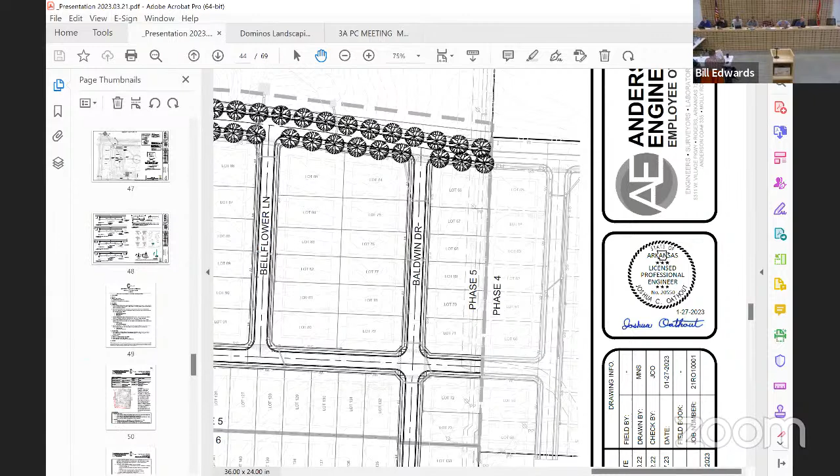All right, under other business, subdivision 2121 Meadow Ridge, adjacent street agreement discussion. Northwest corner of Keller Road and Seba Road. It is zoned R3 single family, 40 acres, 160 lots.

Is the applicant here to walk us through the discussion? I am the applicant's representative. Long way from home tonight. Yes, sir, your name? My name is Tim Lemons with Lemons Engineering.

In preparation of the adjacent street agreement, there were quite a few questions that came up, and staff has been very good to work with us to try to get those questions answered. I can't speak for staff, but I think we thought it would be a good idea to spend a few minutes tonight to discuss this and then finalize our adjacent street agreement accordingly.

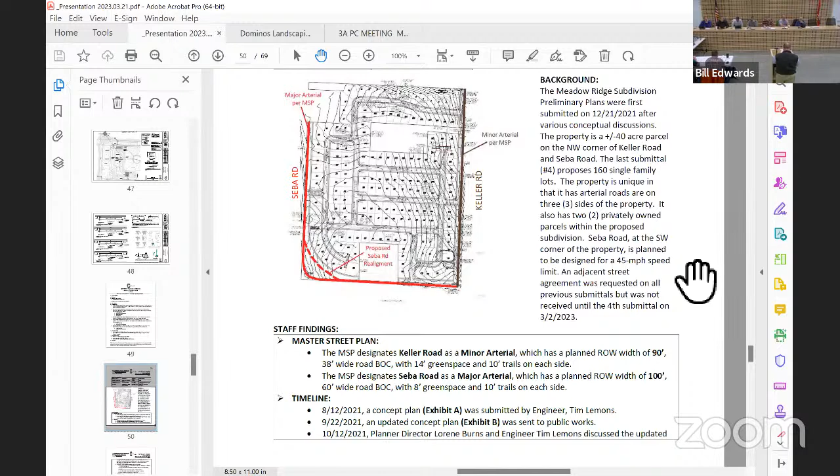Not to jump ahead, but under staff recommendations, which I believe is on page 3, there's not really a lot that's in contention.

One item I would like to discuss with you if I could is the sidewalk width on Keller Road. Whereas Seba is a major right of way, which we're having to dedicate quite a bit of. Do you have a map that shows that right of way dedication?

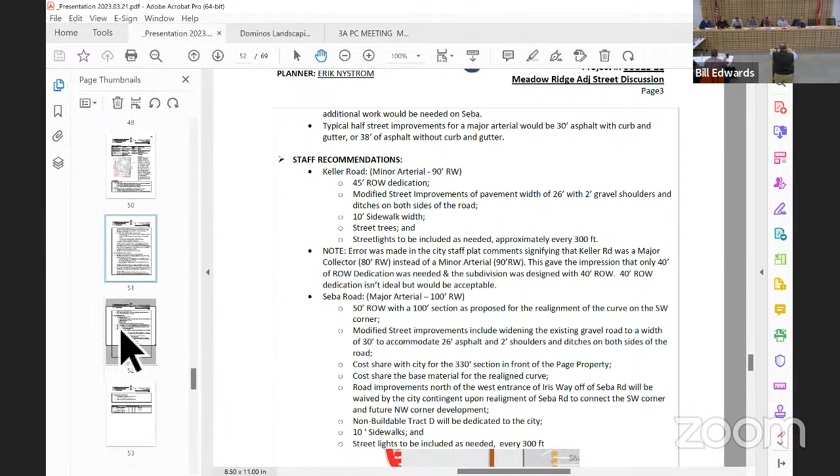If you're familiar with Seba, we're at the intersection of Seba and Keller, the road goes due west, and then when it gets to the end of this 40-acre tract, it makes a real sharp turn to the right. And so basically, there we go, that's a very good illustration right there. That shows where we are, indicating the necessary right of way and creating more of an outfall from that southwest corner. We try to eat some of the burden when Seba gets improved.

So for one, I could see the 10-foot walking trail down Seba, of course, with the 100-foot right of way, but coming up Keller there, we would like to reduce that down to 5 feet if we could.

Of course, that is up to this... Is there a hardship or is it just? Just driving out there and looking at it, I mean, everybody's crystal ball is hazy at best, but I could see development on Seba continuing and going forward.

I don't know there's a whole lot of developable property north of our development on Keller. We start getting into some lower areas, and I just don't know if it's warranted, I guess.

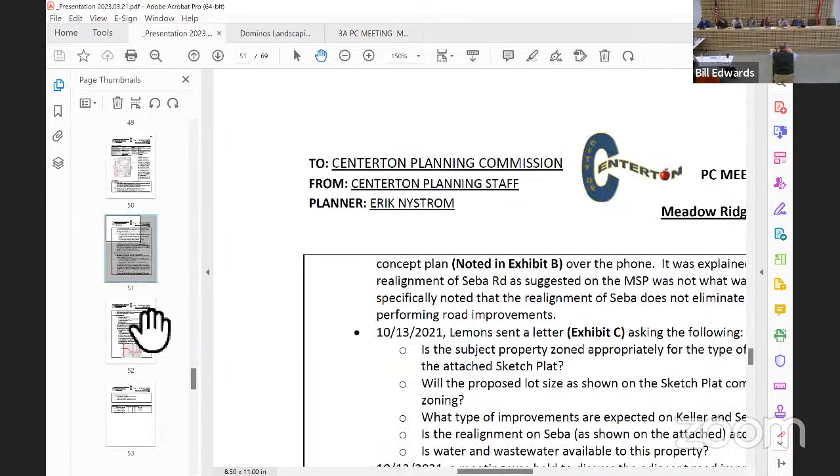The only other items we have: continuing on, the minor arterial designation for Keller is a 90-foot right of way. During one of our past discussions with the city, it was discussed that we could do a 40-foot right of way on our side, and that's what our entire design is based on. We've had plans through 2 reviews, and we're coming back for a 3rd review on our final design, hopefully in the next week or 2. Taking that extra 5 feet out of that right of way is going to be detrimental to our development, because we were going off previous comments of 40 foot instead of 45.

As far as the improvements on Keller and on Seba, the 26 feet with the gravel shoulders, no issues there. The sidewalks, except for what we discussed, street lights, street trees, all that is good. The only other item is the cost share on Seba, and that's something we'll have to get with staff to try to hammer out what that number might be, so there'll be some future discussions on that. So really, I guess our biggest items here tonight are the 10-foot sidewalk width and the right of way on Keller.

I understand that they gave you the wrong width, but is the information that's published wrong? It was actually stated in the comments wrong, and then they laid out all of the plans. Sure, and it was just found—what are we on, submittal 4? Yeah, the last submittal is when it was brought up. I mean, things happen, I understand. Can we look at the master street plan in that area?

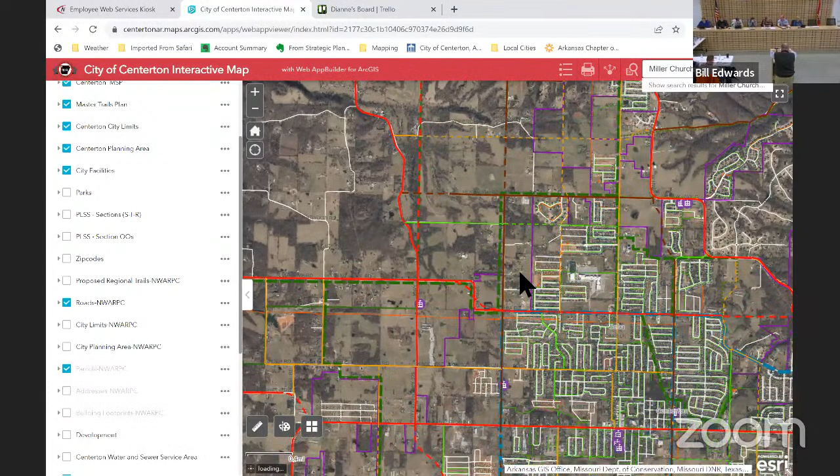Let me share my screen. Figure out where I'm going. And I do appreciate staff and their comment—the 40-foot right of way dedication would be acceptable, so I appreciate them wanting to work with us on that. On a limit line. There we go. Can we go up more to the north? Yeah, how much further do we have? All the way to Herbal. Oh, okay.

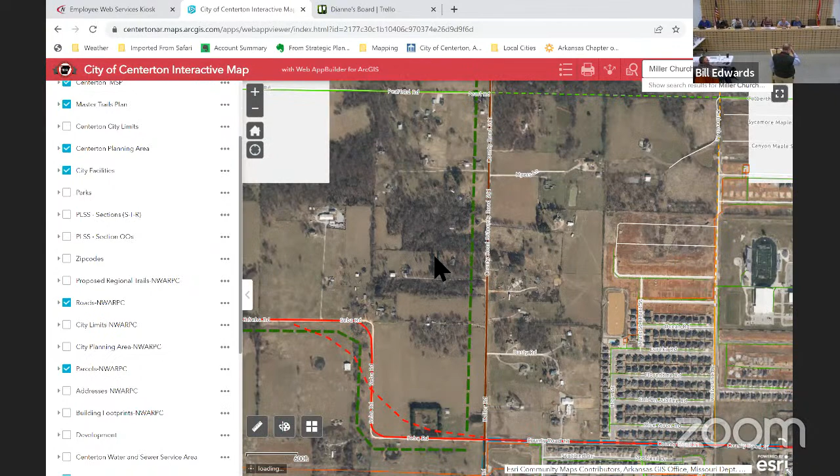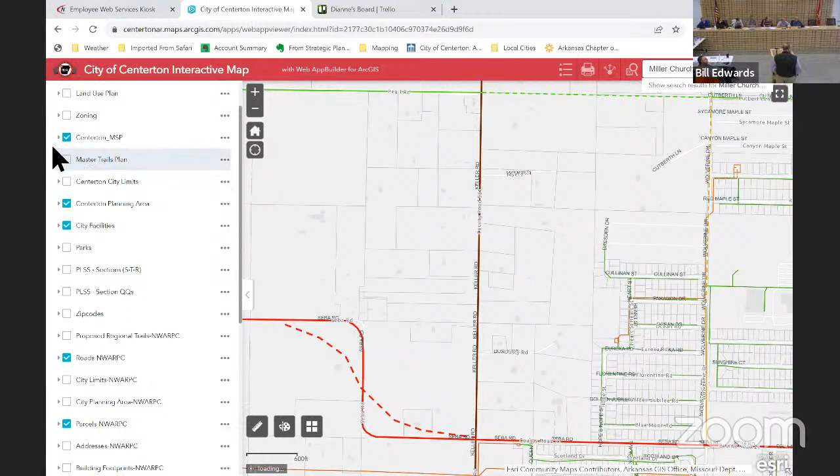That's not ideal, especially at the intersection there. Is the dash green like a trail? Yes, I'll turn those off a second. No, I thought it was. No, a second, okay, there we go. If that's the scale, then our argument over 5 or 10 feet is really a small issue. No, can we turn the trails back on? I'd like to see if that sidewalk was part of the trails we're asking about. We had a big discussion recently about—it'll apply to the park at trail, right? The southeast corner of—but it's not bad. Can we... all right, can I say, is this a 10 or 12?

10-foot trail, the green, or 12 foot? Blue is 12. What's the minimum depth? I don't think it's... this is just... okay, about a couple points before it's submitted. I have something just to talk about. I don't know if this is the right decision, but just want to talk about it.

The problem with dedicating the right of way is it comes into your corner lots, your side lots, which also have a bigger setback, so that's further shrinking the buildable area of those lots, right? That has been taken into account on our latest design. What does your latest design show? We have the same amount of buildable space on the corner lots that we do on the interior—we made the lots extra. Oh, okay, I got you.

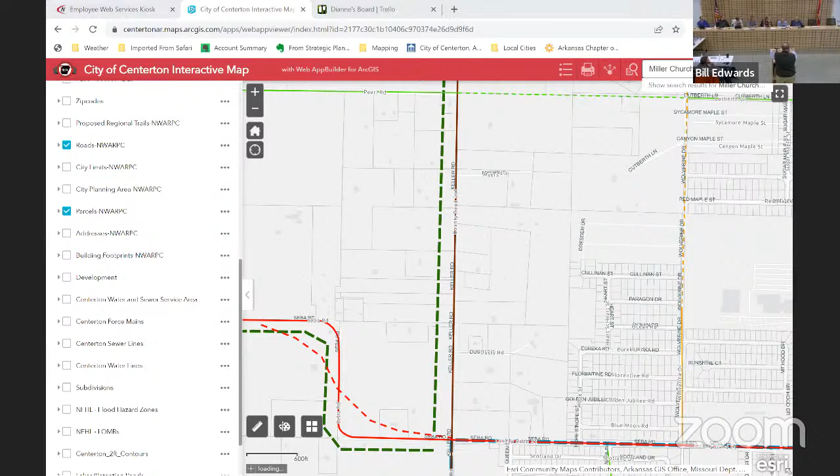I mean, I hate that we're in this situation, but really, what's best for the city is to have the 45 feet of right of way and a 10-foot trail.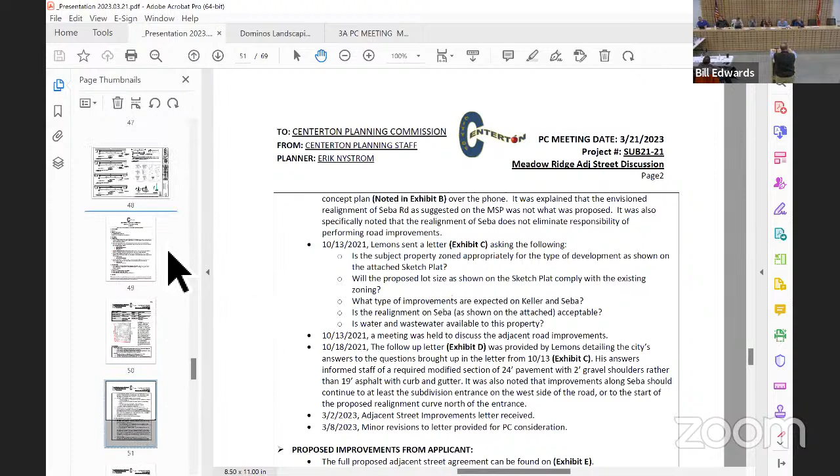I will also mention that if you go to the subdivision plan—I saw this, when did I send you that email? Last week, I guess—there are hammerheads instead of cul-de-sacs. I have good news for you: looks like there's cul-de-sacs replacing the hammerheads. We've never done a hammerhead—only in a subdivision. I talked to my client and was able to talk him into losing a couple of lots, but this is not our plan here. I'm not sure—that's where... but this was the original concept.

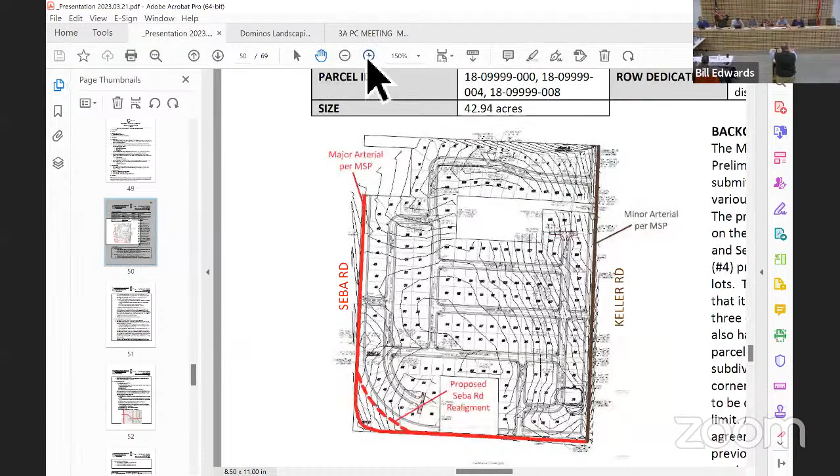I'm just going to say there are some setbacks on this. So where I was going with that—I think, in the best interest of the city, the 45 feet is best, especially at this intersection. I also think it's on the trails plan, the 10-foot, and that's important too. So what I was going to propose as a talking point is reducing the setback and going for some sort of variance on those lots to not burden them anymore. I don't know how you prove hardship on that, but they've already got a 20-foot setback in the rear. On those lots, if you reduce them to 15 feet, you've got a major road going through there. That's right.

I don't like it either, Lorraine, but a variance would still have to go through, we're not approving a variance, that would have to go through.

The reason why 40 works is the section from a minor arterial to a major collector. The difference is the amount of green space between your 3-lane road. Both the minor arterial and major collector are 38 back-to-back roads. Your green space goes from I think it's 9 to 14 feet.

Okay, well, that's, yeah. I was wondering why there's so much green space between the back of the right of way essentially, and the back of curb. And that's part of the reason why with 40, we can still make it work.

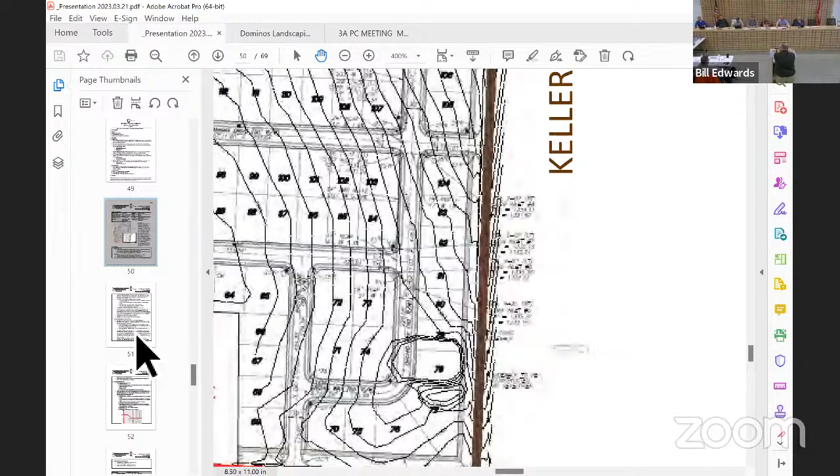So here's the other question. When the neighbor comes in developing property to the east, what do you tell them? 45 feet. Right, we've had to do adjustments all over, where we only have 30 feet from the old master street plan and then we go. There's more on one side, yeah. So we just have to make that adjustment on that right of way.

Okay, well, with that said, if the difference is just the green space, and I wasn't taking that into account, I would be okay with the 40. We're not losing any driving width or anything like that, right? Lane width, no. Okay. That impacted the 10-foot trail.

However, I think the 10-foot trail is pretty important. Does that impact the 10-foot trail, is the question. No, gotta go 10 feet, we'll go 10 feet. I mean, he already shows 10 foot on his current plan.

The key is making sure that with the half street, them paving 26, as proposed, that the ditch still drains. So usually that's part of why you need some of that width, is for interim half street improvements, the ditch on the west side.

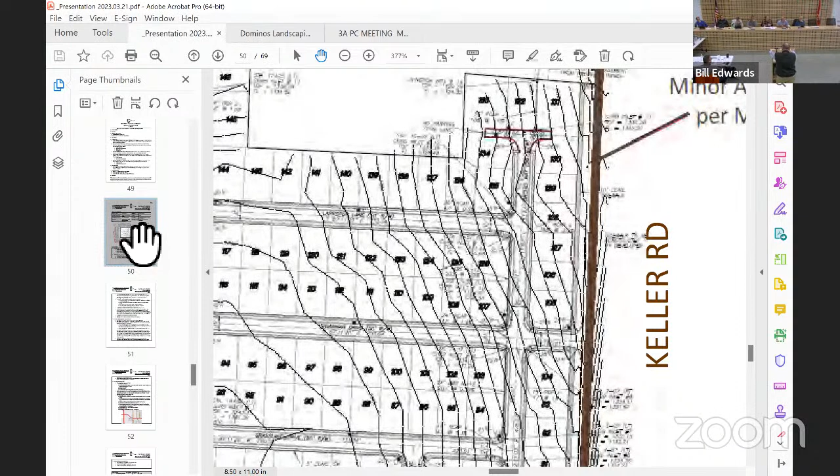West side. Between the 10 foot and where he paves, you'll have about 13 foot of pavement off his property line. And then you'll start the ditch. Is that not being piped?

With your modified half street, that's part of what we're talking about. He's saying paving 26 feet, 2 foot gravel shoulders, then it's a ditch line, with pipes under culverts for the entrances. Then you're back up to the 10 foot trail.

You're saying 36 feet is the ultimate build out, right? 38 is back curb, back curb. So any expansion in the future, next buyer, they would do the pipe on the west side as needed.

Do 4 foot widening on both sides with the curb and gutter. There is curb and gutter. Not on this. When the property side develops, the section, so that's part of the half street improvements. The first one paves a wider section, he's paving 26. The next guy comes in, only paves 4 on both sides, 8 total, and does curb and gutter on both, so he's eating all the pipe off, but none of the gravel.

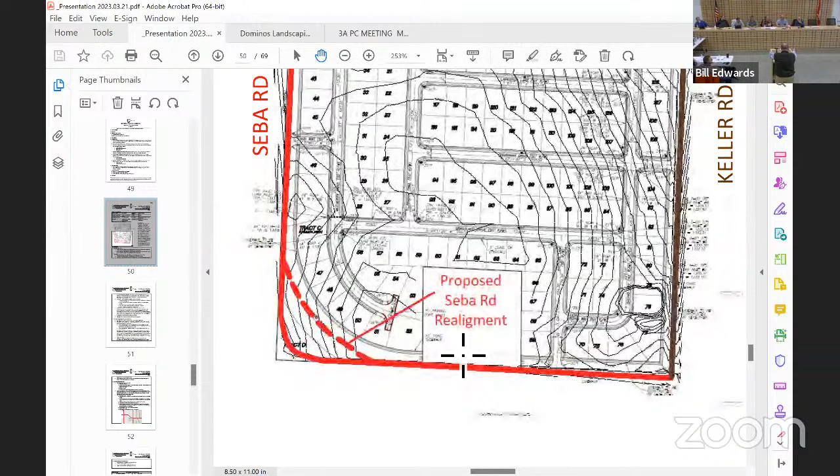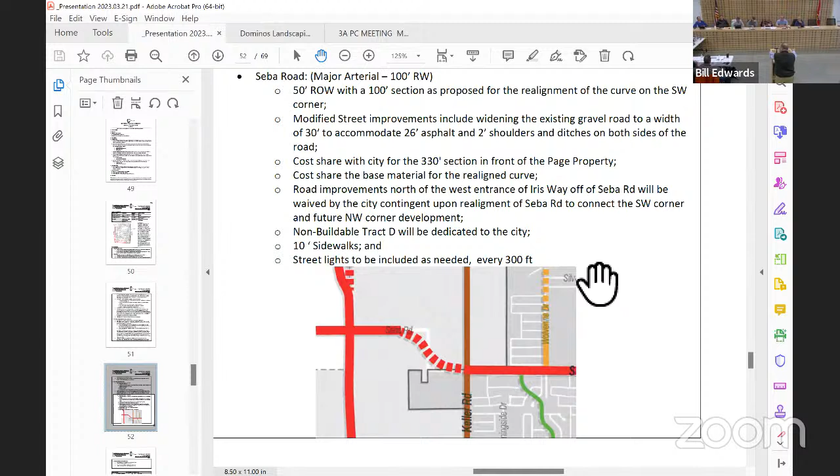So what's the cost share between the city and them? We need cost estimates. If there was no realignment, none of this, what would it cost for us to do the regular widening for the whole thing going around? What if we stopped here, what would it be? There's also that consideration with the realignment, and a half acre parcel in that corner between the existing road and the future one. If we're going to donate that, those actual numbers have to be finalized, but a lot of it is for him to finalize. We can approve this, but he needs to know what to design, so then we can go back and review and provide an agreement for your approval.

So that's a 40 on Seba, 40-foot back to back. Is that what you said? Major arterial is 60, 5 lanes. I'd be interested if the 26 made the numbers work, because it seems like we're doing 26 on, is that Keller? Yeah, and that's only a 40 or 38, whatever we decided there. You'd be at 40 right away, back to back, 38. So we're adding a bunch more width that's supposed to be there on Seba.

But I know you'll review all the numbers, I'm just wondering if the 26 is actually apples to apples when we start looking at that. But that's up for y'all to figure out. Back to Keller, that's what we need to talk about, right? He ultimately said he would agree to the 10 foot if we stick with the 40 foot, and we'll agree to the 40 that you were on. Are those the only two that we need to? Yeah, everything else seems to be agreed to. Okay. The temporary section spelled out right there is what we have on our plan, so we're good with that.

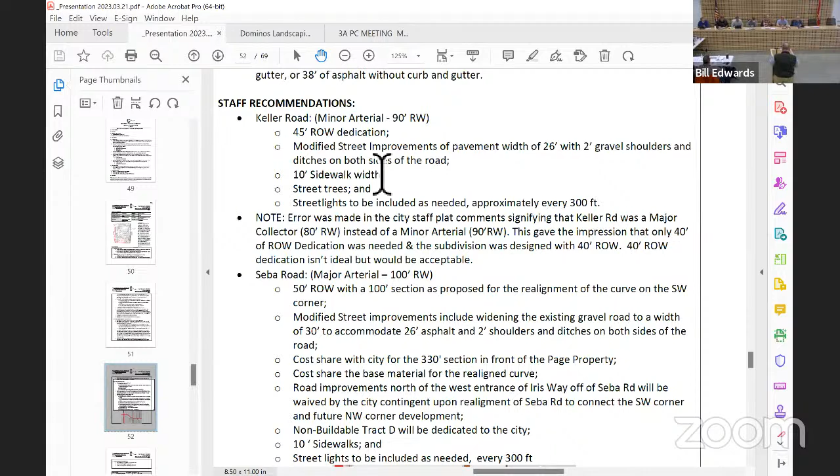Any other discussion from any of the commissioners? Does that make sense to everybody, what we talked about? Okay, appreciate your time, thank you.

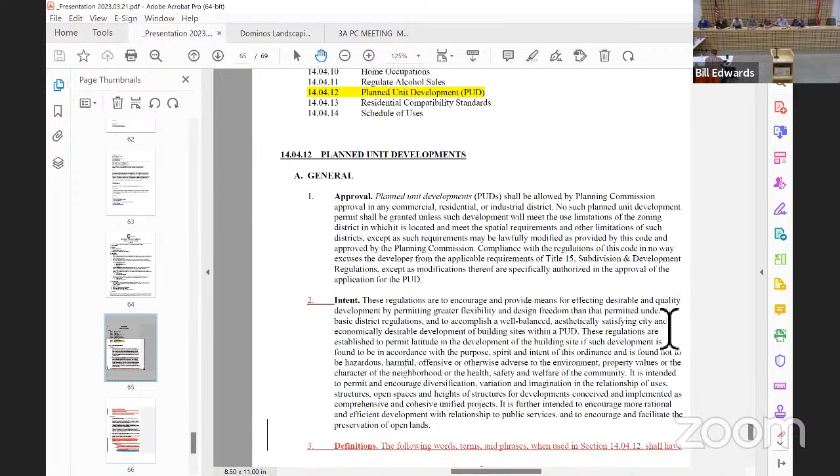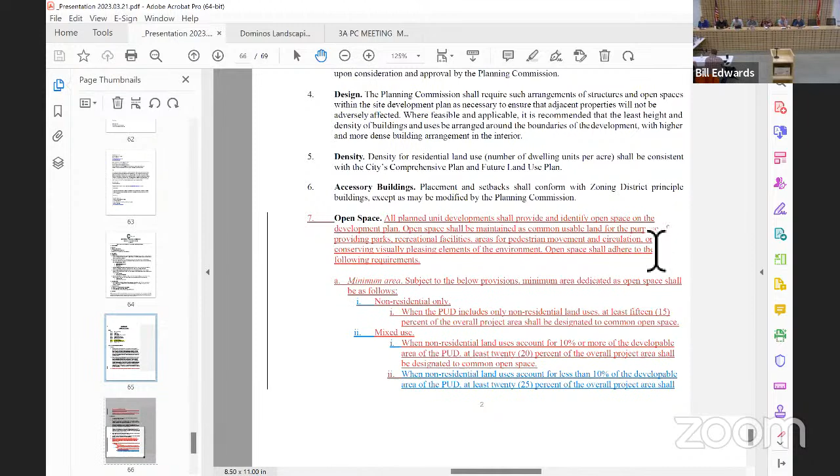Staff wants to go through it, but I'd like for you also, if you have a chance, to go through it and email us your comments so we can get a draft incorporated and bring it back to you. Does it take out floodplain and detention considerations? This didn't exactly, it made requirements on that, which is something I want to look at, along with utility overhead power line easements. And then also the retention ponds, we allow half of that to be used towards their green space, but I think it should be limited on how much of that green space it can count toward, because if it counts half of the green space, you have to really quantify how little is left.

Was that by the substation or the apartments when they expanded? They used all the floodplain as their green space and it was in the very back, and it's not even usable.

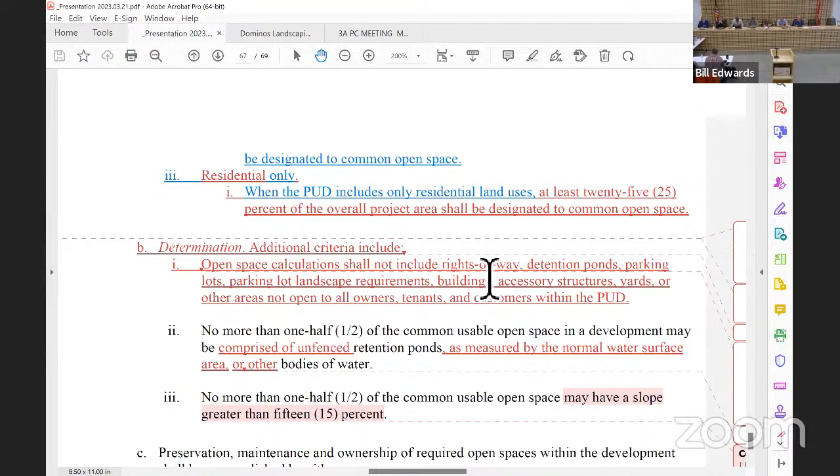Bill, help me out on this - the House bill on the Airbnbs. Well, what do you call them? They're not Airbnbs. It was held back over spring break and the author is making changes. But the 60-day approval of plans did pass the House and it's going to the Senate.

There was a comment that they had taken out some of the harder things that would make it easier to deny. So basically in 60 days, if it's not ready to approve, we've got to deny it, but we need a basis on what to deny it. If it doesn't meet the code, can't we?

But that means they're gonna have to get the code ready. What we're gonna do is the burden on all the developers is gonna skyrocket, as well as on Kayla, the new planning assistant, because in 60 days it gets denied if you didn't meet Title 16, Title 9, Title 14, Title whatever. I think their intention was making it easier on developers to get something approved and ready.